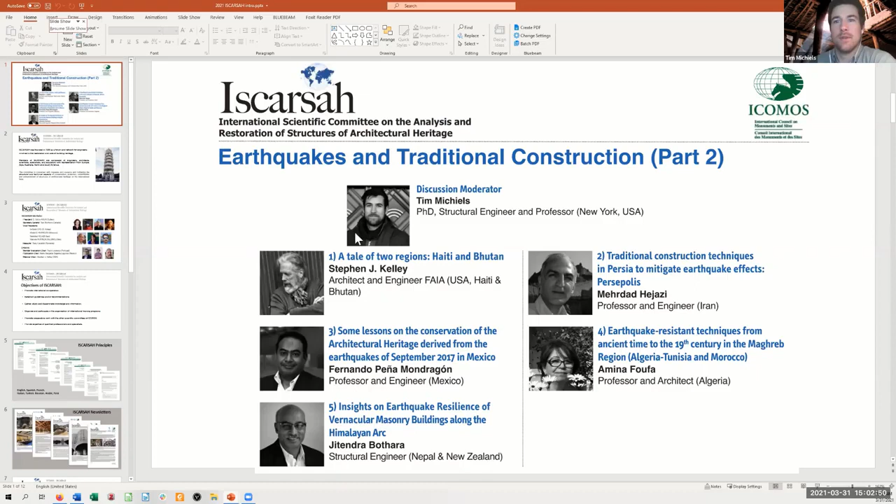by ISCARSAH, the International Scientific Committee on the Analysis and Restoration of Structures of Architectural Heritage. While more people join, I want to briefly introduce our scientific committee. We are an international group of engineers, scientists, and educators dedicated to the restoration and care of built heritage. We focus on the structural and technical aspects of conservation of architectural heritage.

We have an elected board. Our president is Gorun Arun, and our secretary general is Tom Morrison. He is leading the discussion in the chat today. The goals of ISCARSAH are, amongst others, to disseminate knowledge, promote international cooperation, and organize international training programs. Another goal is to collaborate with other scientific committees, and we are happy to welcome members from a wide variety of ICOMOS committees attending today.

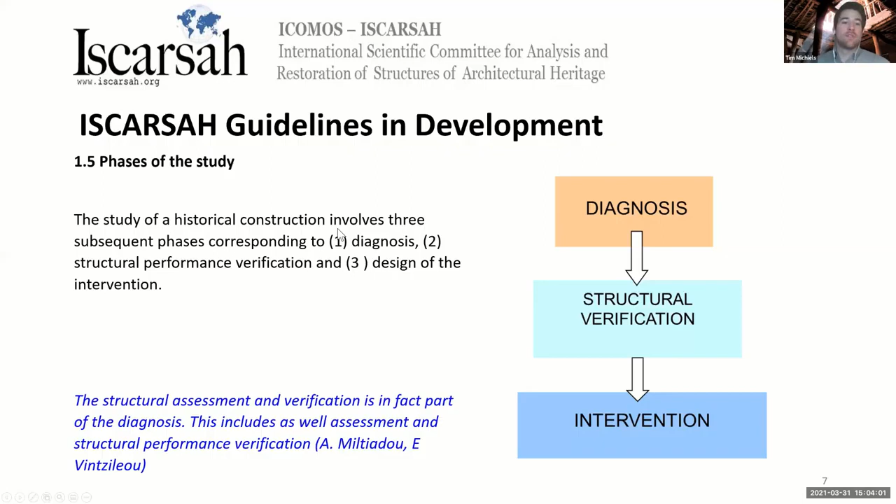In the past years, ISCARSAH has published Principles for the Analysis, Conservation and Structural Restoration of Architectural Heritage. We publish newsletters and currently are developing guidelines for the analysis and restoration of heritage structures. Pre-pandemic, we were organizing yearly workshops. The latest ones were in Korea, Turkey, and the very latest one in Iran.

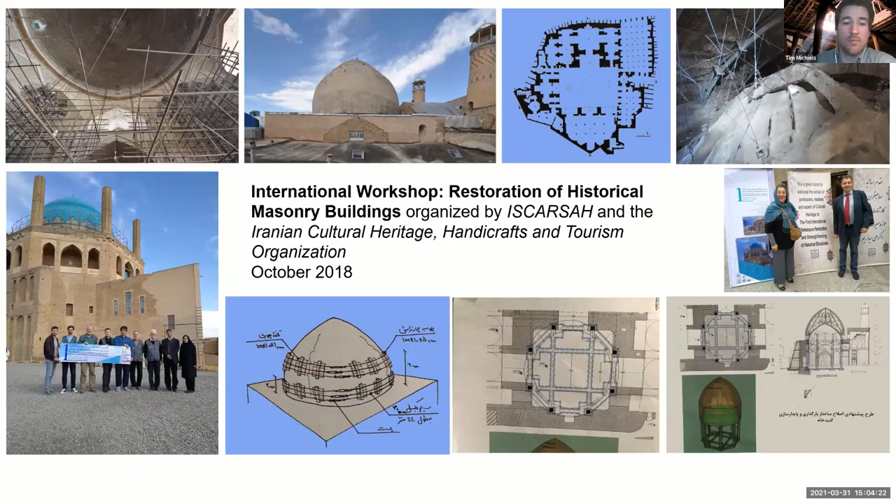Okay, that brings us to our webinar on traditional construction and earthquakes. In this webinar series, we are highlighting traditional structures because these buildings are often seen as the most vulnerable to earthquakes. Often, though, these buildings have seismic mitigation strategies built in as part of their original construction or past repair.

Unfortunately, the built-in knowledge has sometimes been lost or is misunderstood. And thus, as safekeepers of old buildings in earthquake areas, we all grapple with the same question: how do we ensure the life safety of the users of a building while also making sure that that building is preserved with all its valuable features for future generations?

Sometimes engineers take a conservative approach that tries to maximize structural strength, yet they go well beyond what is actually needed to ensure life safety. Often, this damages valuable elements of the building, and those well-meaning interventions might paradoxically in the end contribute to a building's destruction. Additionally, the regulatory framework provided by building codes to properly deal with traditional buildings is often lacking. Thus, we need to study, learn, and discuss traditional architecture, and that's why we are here today.

Building technology in seismic regions has evolved over centuries, leading to local seismic cultures. Today, we have another 5 distinguished speakers who will discuss the local seismic cultures they work on. We also hope to hear from you. We look forward to taking your questions after all the presentations.

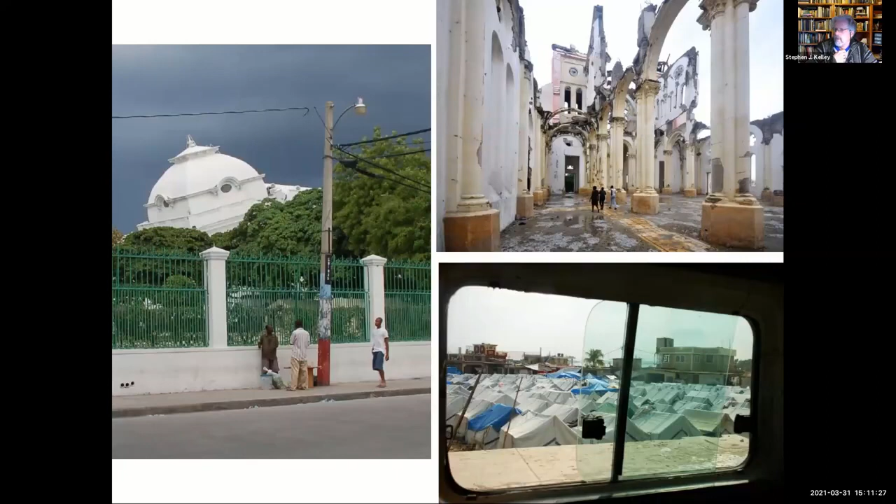So what I'm going to talk about is the gingerbread houses of Port-au-Prince. When we went in 2010, there were about 300 gingerbread houses, all built from the 1880s to the 1920s. We looked at about 200 of them, and there are about 150 remaining.

The construction types well known for Haitian gingerbread houses are: number one, timber frame, or pan de bois; wattle and daub, or colombage; and unreinforced masonry bearing walls. The mortar used is a mixture of clay and lime, and the wood was locally harvested.

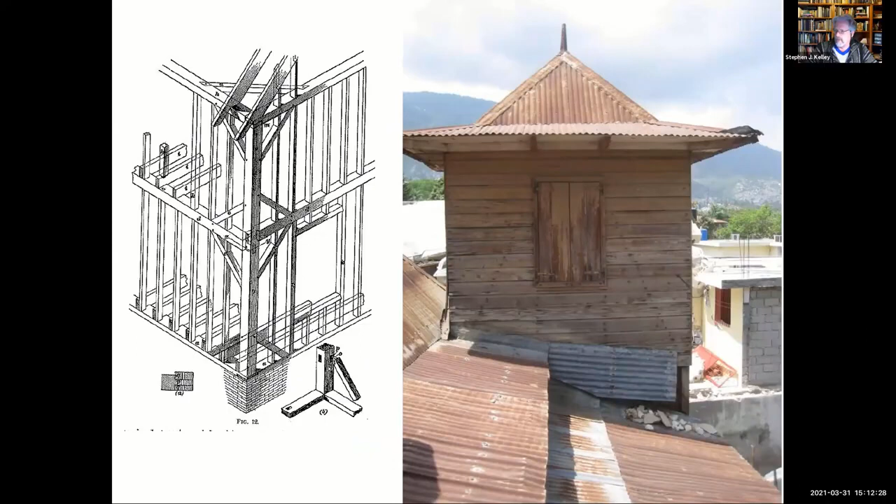The first part, the timber frame — I think many of you are familiar with this type of construction. This is a wood construction that has a brace frame in it. And there's an example of a gingerbread house made mostly from timber frame.

Then there's the colombage, or wattle and daub. This is a timber frame building where the infill is filled with either rubble, stone, or brick.

After 1925, when wood construction was banned in Port-au-Prince, a lot of concrete block or reinforced masonry structures were built next to, or as additions to, many of these buildings. These building forms did not work well together, which was something we saw during our first assessment — but that's a talk for another time.

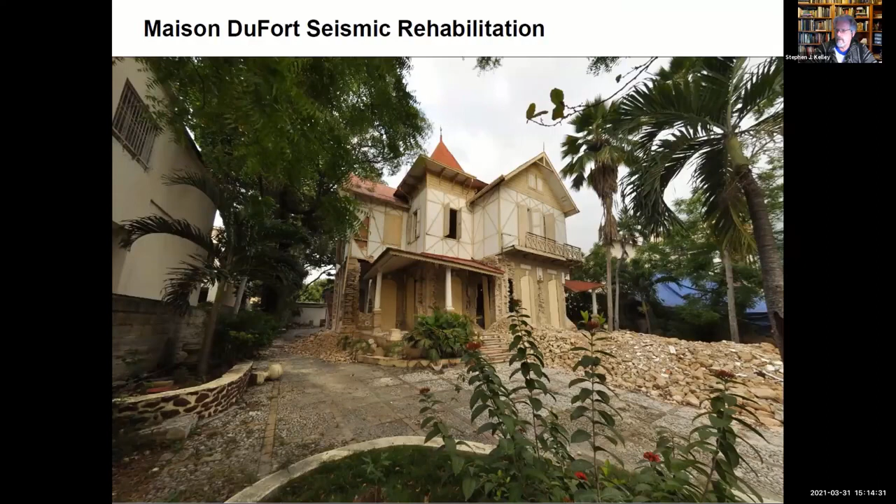The interesting thing we saw with this particular building is that the first floor, which was unreinforced masonry, was entirely destroyed — you can see the condition. We were able to go up those stairs very carefully, and found that the second floor was in fair condition.

I have to give a shout out to our colleague, Randolph Langenbach, who we were with. Randolph was the person who noted that we had these horizontal metal ties in just about all of these unreinforced masonry gingerbread houses that we saw.

They had these wonderful fleur-de-lis patterns where they came outside of the building. This here is from the Maison DuFort. This is one of the reasons why the Maison DuFort didn't entirely collapse, because these masonry ties were holding up these corner piers. If these corner piers had collapsed, the building would have just fallen onto the ground.

Randolph came up with this idea that since labor was fairly inexpensive in Haiti, what we should do is hold up the second floor with emergency shoring, and then reconstruct the first floor unreinforced masonry. We came up with this idea of putting in new horizontal ties.

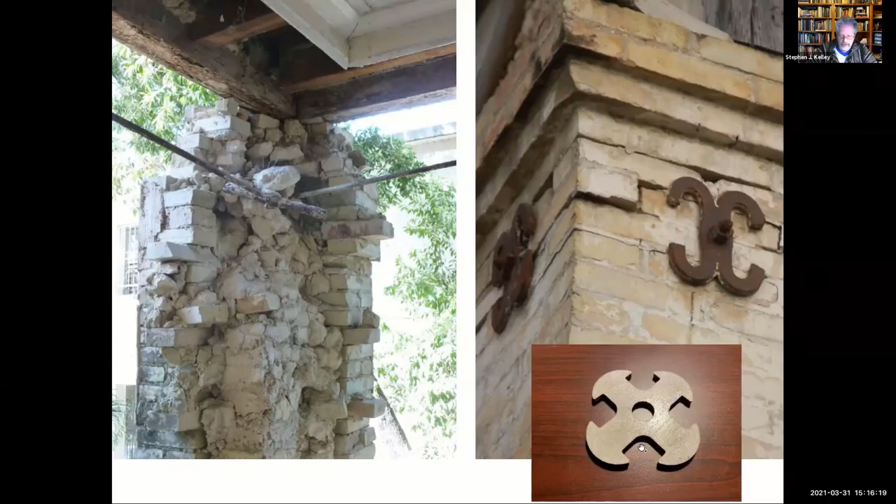Although we were going to put in many more horizontal ties, we made them out of stainless steel. Here is a stainless steel plate that we had fabricated in Miami. We cut it using lasers. You can see that this was about the same size as that. You'll be able to see some of those where we put them in.

So we came up with this scheme to hold the second floor in place. And we worked with our partners, the Institut du Patrimoine Wallon, which is out of Belgium, the southern part of Belgium. They were maçons and charpentiers, and they came in and they were working with the drawings that we were providing with our local architectural partner.

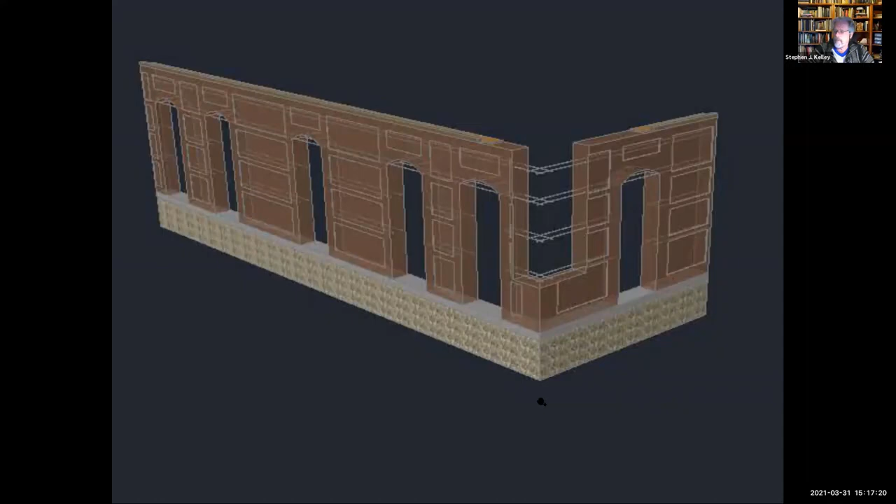Here is the building with the first floor removed and the second floor held in place. It was not moved, it was left in place. We had to do some work on the foundations, which I will show you. There was plenty of brick to be salvaged. You can see piles of it that our local counterpart was purchasing and having delivered onto the site.

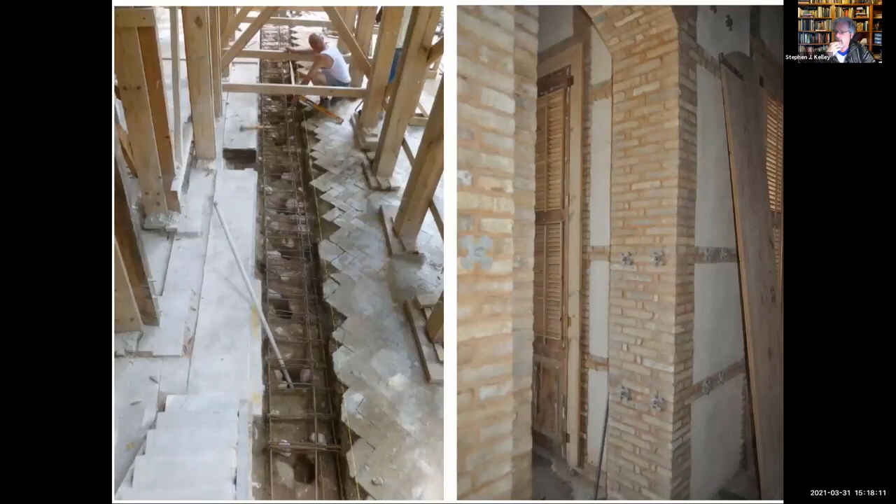Here is the foundation system. This is the only place where we introduced reinforced concrete into the project. The original foundations are rubble stone laid in clay, and we poured a grade beam on top of the foundation system, but below grade, and this is what we used as a basis to erect the new masonry walls.

This gentleman here is Patrick Lacroix from the Institut du Patrimoine Wallon. He was our mason, and he was actually doing a capacity building exercise, teaching local masons how to work with lime mortars. So we put the whole thing up with lime mortars.

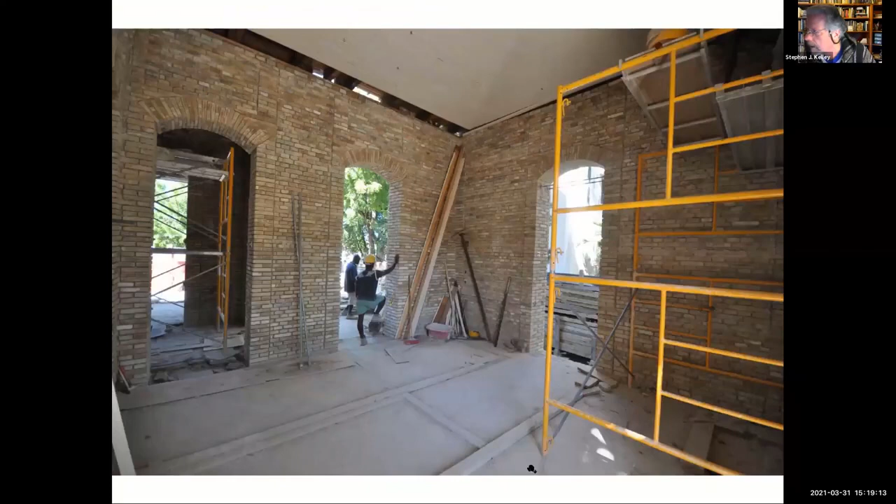Here you can see the walls almost being erected. And if you look here, you can see the fleur-de-lis pattern. And here are the walls ready to receive the second floor.

I wanted to run these horizontal stainless steel ties through all of these arch spring points, but Madame Pierre Louis would not have it. She agreed that I could do it in one area. I always like to show what the intervention is, and she allowed us to do it in this one particular area. So this is what the building looks like, fully restored.

This is during one of my visits on another project in 2017. This has become an art gallery and a venue for music and art performances. You can see that we were able to develop this very open atmosphere.

By the way, this building was built by Haitian architects who were trained in Paris. Because even though Haiti had its independence, people who were going to university, many of them went and studied in Paris. So this was designed by a Haitian architect. The forms are very French and European. However, the forms have been adapted for the Caribbean in that the entire first floor has no windows, there are doorways all around on the first floor.

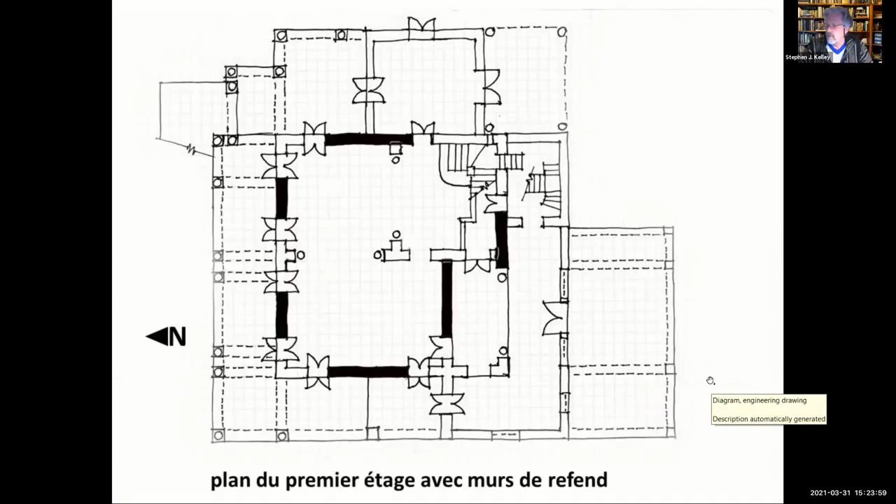And to give you an idea of what that type of thing looks like, these are the types of interventions that they were doing. My last visit there was almost a year ago. It was my last international visit before the pandemic came, and I was worried about being able to leave the country, and I've been able to follow what they're doing over social media.

Second area I want to talk about is Bhutan. Now, Bhutan is located between India and Tibet, which is now part of China. So it's in this arc of the Himalayas, on the southern slope of the Himalayas. My project was located in Paro, which is where their international airport is. And I'm also going to talk briefly about the Wangdu Phodrang Dzong, which is here. So I was working in these two areas.

By the way, for those of you who were able to join us during the first webinar, Professor Arun Menon talked about his work at the Wangdu Phodrang Dzong.

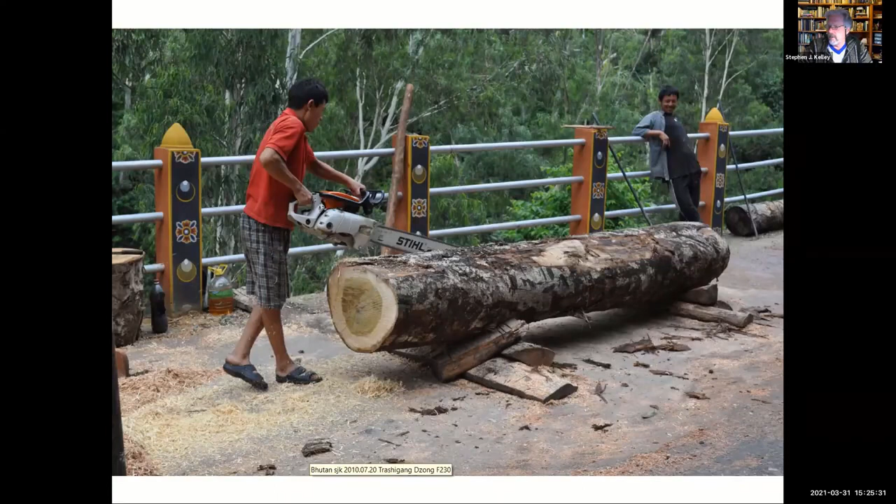Here they put up the formwork on either side. They normally lay a horizontal wood member within the rammed earth wall - that's something important to remember in this talk. And then the roof is actually separate from the rest of the building; you see the roof is sitting on the building. So during a seismic event, the roof is not going to be bringing a whole lot of mass to what's happening there, because it's going to be moving separately.

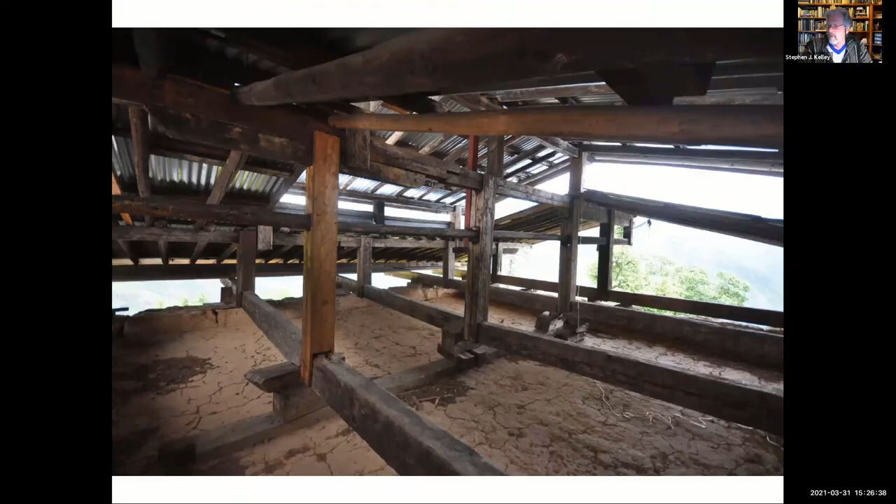So I'm going to talk about the Sito Gumpa. This is a monastery. Here is the temple itself and the monks' quarters on either side. Here you're looking at the temple straight on, and here is the other side. The temple has these beautiful paintings on the inside that are placed on paper.

So this is what the floor plan of the entire monastery was like, and here is the temple. The idea was to seismically rehabilitate the temple, and these areas here were rehabilitated. Actually, they were reconstructed - pulled down and rebuilt on site, because you can do that with rammed earth. One thing we did was add a separate kitchen and dining room to complete the courtyard, because the kitchen was on the second floor of this structure and we were worried they'd burn it down. They have problems with fires here, so this was the plan for the entire site.

These are some of my partners in crime, Chuning Dorji and Karma Wangchuk. Sonam Tashi is not in this photograph, although I hope he has called in this morning. He is - a shout out to Sonam, Chuning, and Karma.

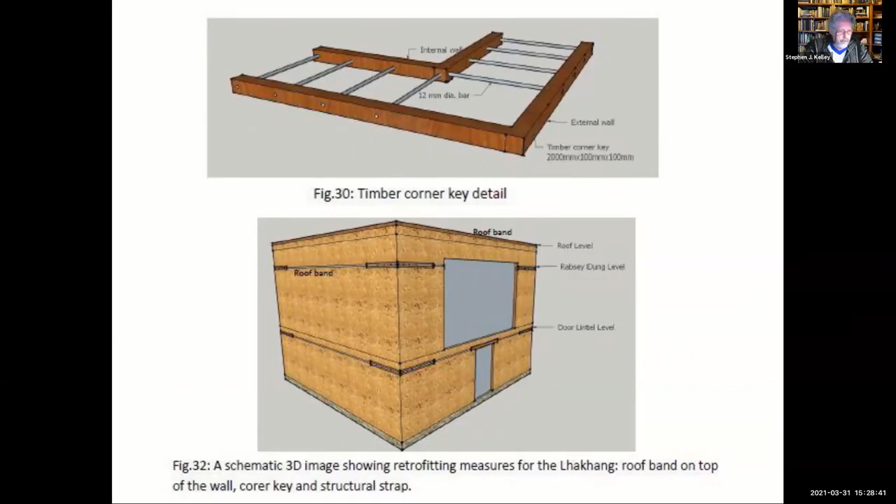At the beginning of the project we had a long four-hour ceremony that included ritual dancing and a feast where all the villagers came in. And then we went to work.

Here's the inside of the temple with all of the paintings removed. I believe those are some of the paintings there that are wrapped up in the paper.

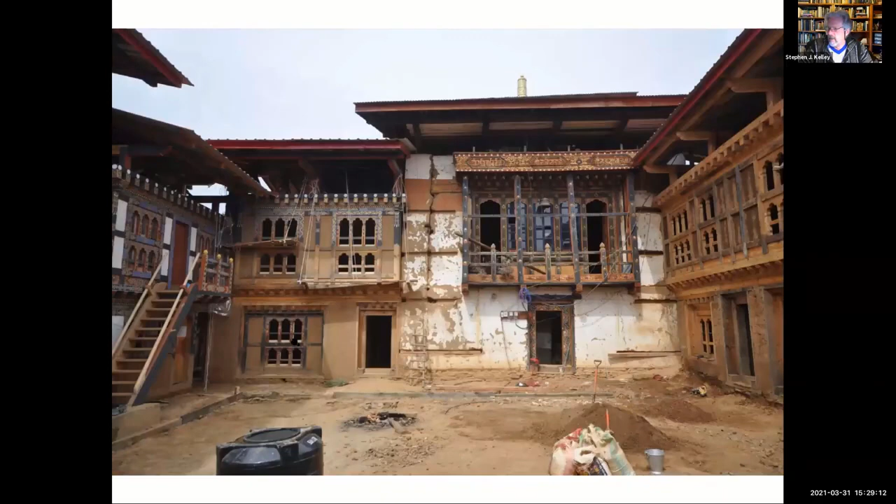You can see now that a lot of this area has been reconstructed, and here is the temple, and here is where we're cutting in and installing the wood. It's going in now, and here is the entire group of people that were working on the monument.

Here's Sonam, and here is my favorite plumber, and the entire group of villagers who were working on this. We had to wait until we were off season because all of the villagers are rice farmers.

And the exterior of the temple, you can see that. And here's the last part where we're actually wrapping it with a polyester strap - it's the same material that is used for seat belts in a car.

Then they were covered with a clay parging on the outside - everything is clay. You can see that we are actually leaving the strap exposed in these particular areas because we want people to be able to see what the actual intervention is.

And here we're finishing up this project. The paintings went back in place. We had a ritual to dedicate the new temple, and that's the completion of the Sito Gampa monastery.

In the last minute, I'm going to quickly show you the Wangduephodrang Dzong. This is an administrative center that has a series of courtyards, and the important aspect here is this building called the Utze - you can see the Utze here.

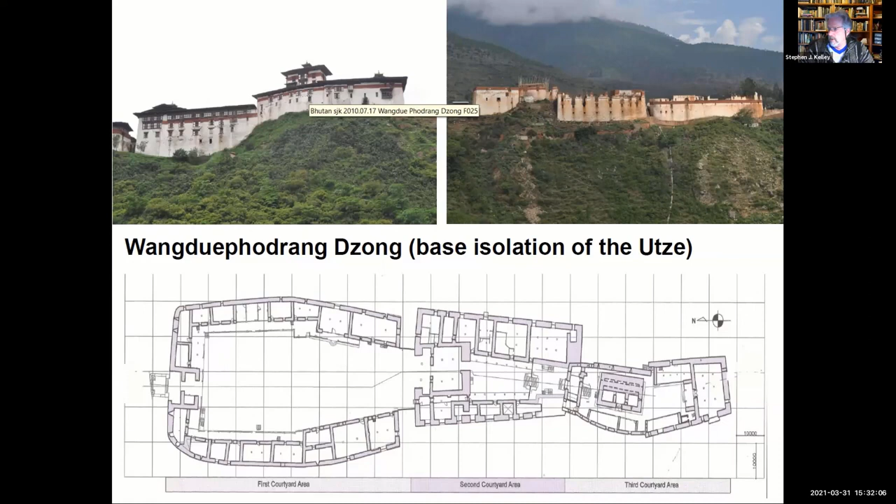And so with that, I'd like to say thank you, and open it up to questions or go to the next speaker. Thank you very much.

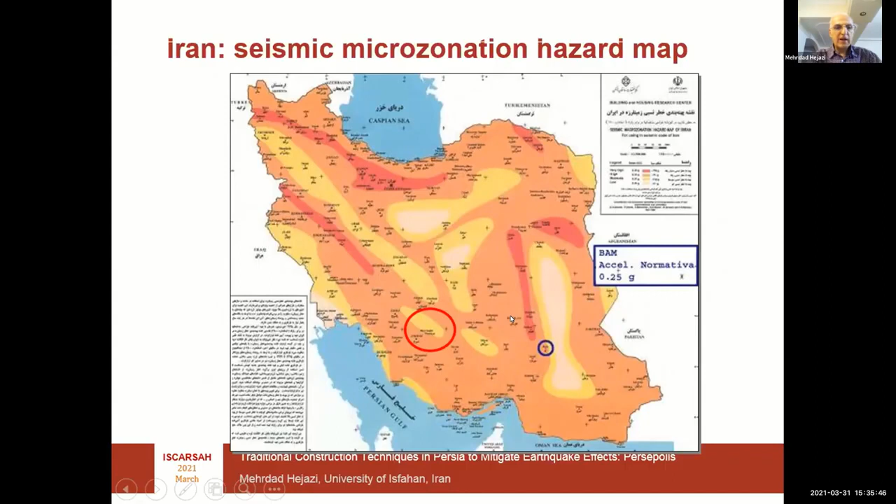First, let's have a look at Persepolis. It's quite a huge site, more than 120,000 square meters in area, and its construction took about 100 years. And this is what we see today.

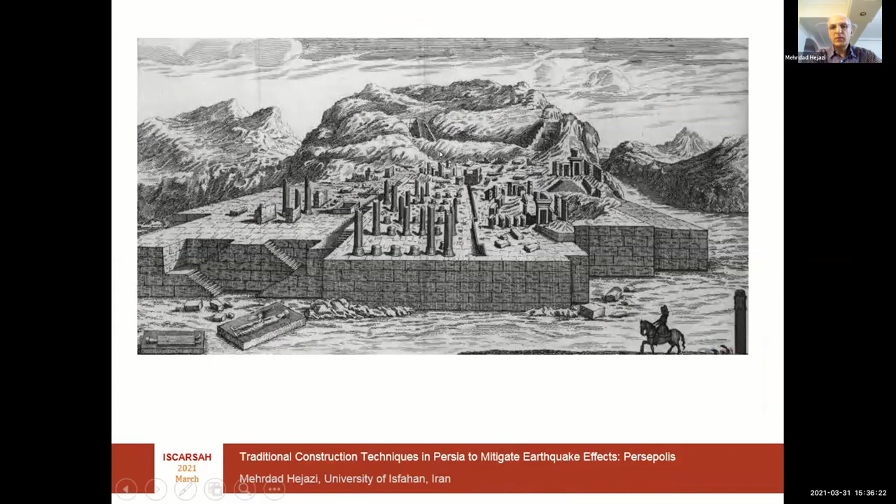As you can see, the site is constructed on a high platform, just adjacent to a mountain here. And if we go back a few centuries ago, say 25 or 23 centuries ago, this was the situation it had. And it is very important that this site was not a governmental site, but it was a ritual site for celebrating the New Year, which we call Nowruz in Iran, and it is on the 21st of March. Since then, still we have the same ceremony, and it's a very important ceremony for Iranians to celebrate that. Therefore, the Persepolis Palace was very important to Persians.

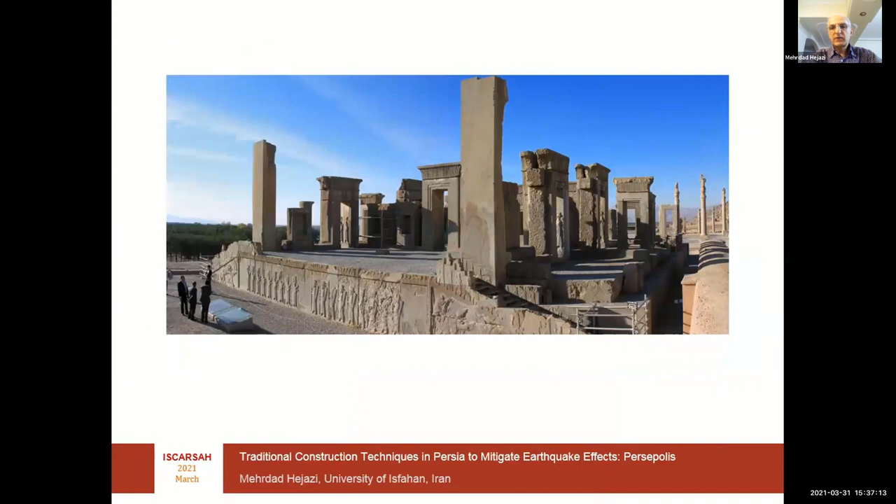It's the situation at the moment. These are the remains of the site. There is a World Heritage site, it is very well preserved. And even there have been some researches into the building, this site. For example, if you have a look at the plan, you can find the golden proportion there. It means that the design of the plan and other dimensions were based on some ratios, mostly on the golden ratio.

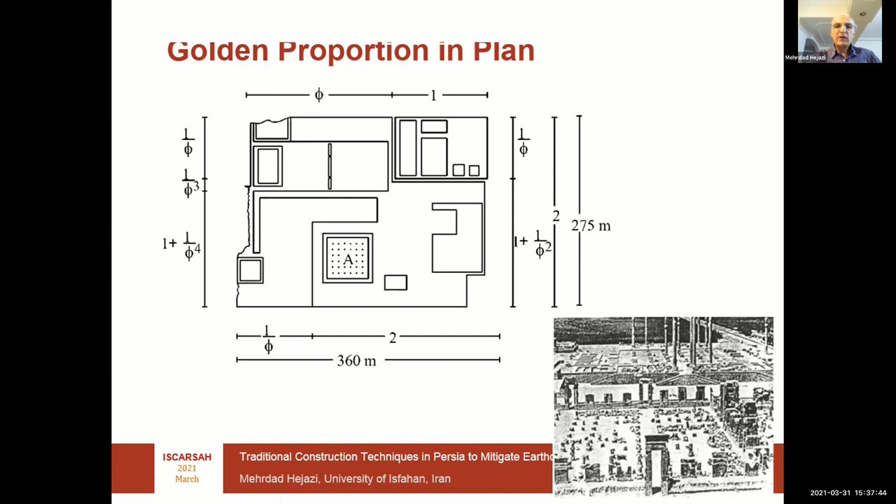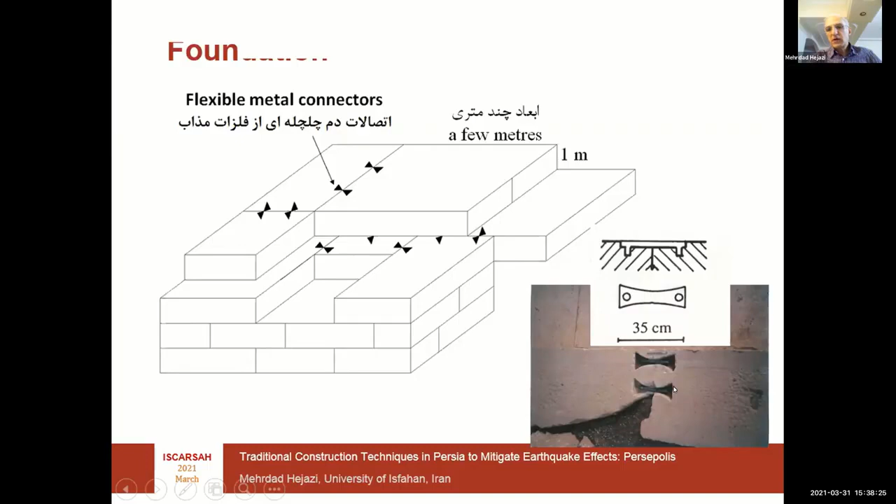Let's go to see how the foundation was built at that time. As you can see, the foundation was built in several layers of stone. And these stones were connected with flexible metal connectors. We see the same procedure, the same method, for other sites. Even at present, you can see the metal connectors which connect the stones together, and still it works.

This is the remains of Pasargadae Palace, and this is the tomb that most of you know. It's the tomb of Cyrus the Great. And if you go to Naqsh-e Rostam near Takht-e Jamshid, near Persepolis, you see some sort of stone tower which worked as a calendar for the new year and some sort of ceremonies.

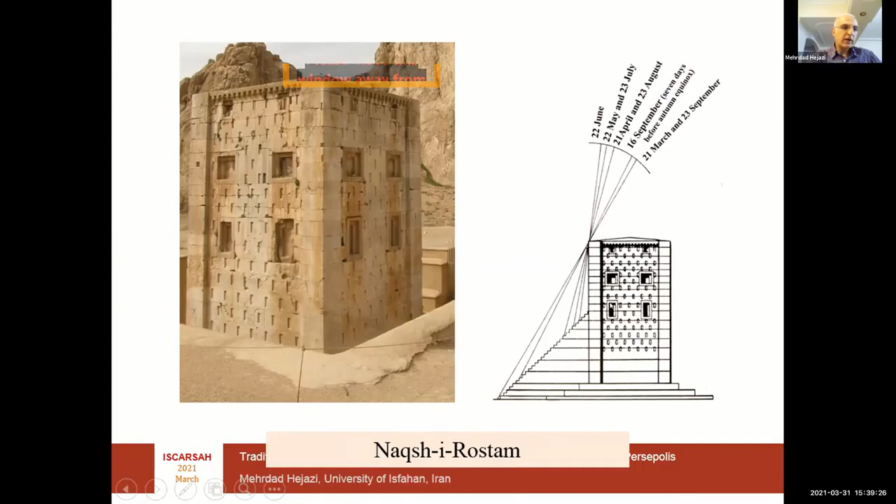Let's have a look at the foundation. We start with the foundation of the tomb of Cyrus. As you can see, they dug the ground, they went down 1 or 2 meters. Then they put the first layer of the foundation, which was stone, and then they put the second layer or the upper layer of stone. They were just put together with no connection. You see the same technique used in that tower here - the first layer and the upper layer on the ground level, and also on other buildings.

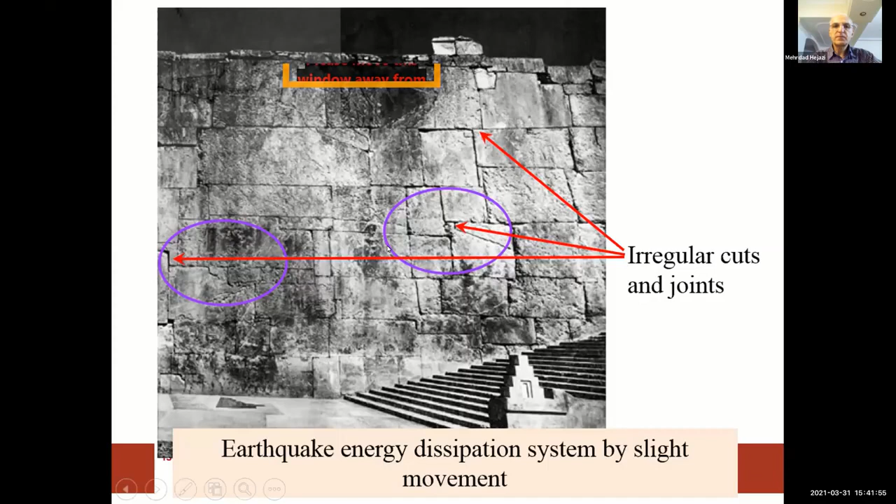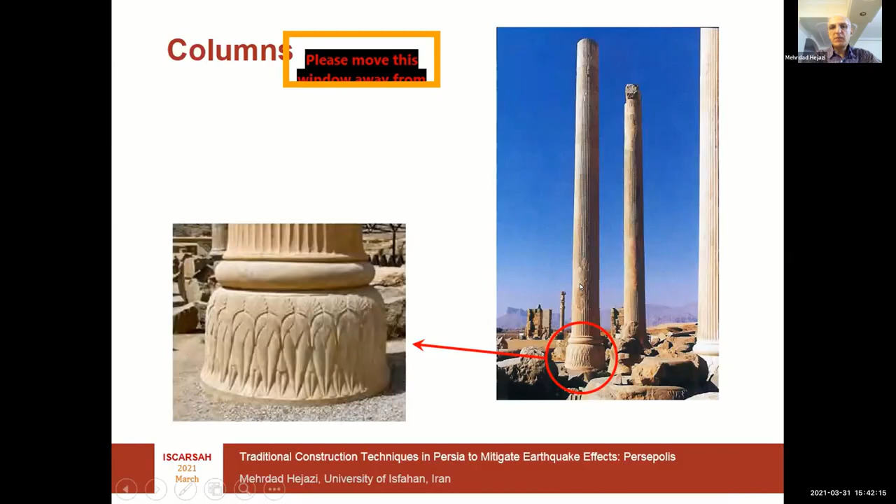Let's go to the columns. If you have a look here, there is a special connection between the main part of the column and the support part of the column - it's like this. There has been a connection between the two parts in order to make it possible to rotate somehow, because with this technique it is not a rigid connection anymore, but somehow semi-rigid. This means that if the top of the column would like to move, it is possible at the bottom that you have some sort of rotation, and it prevents cracking or breaking of the stone.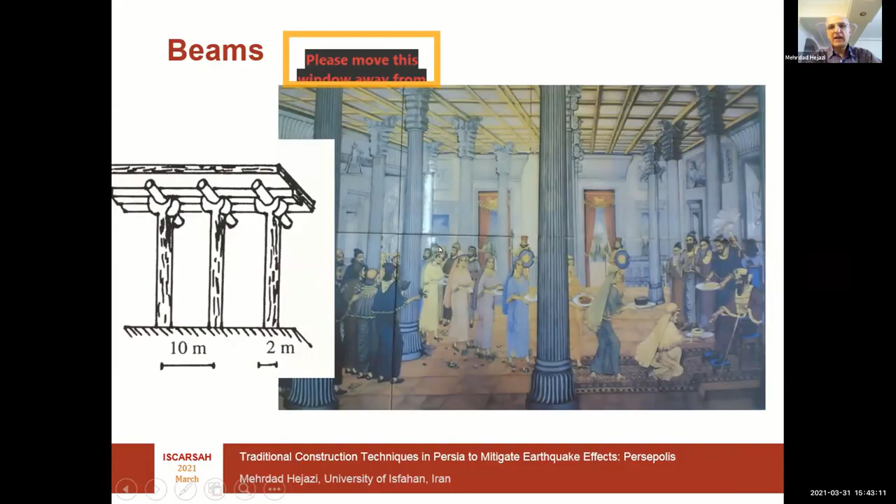And if we go for the beams here at the top, the beams were wood, and it's like this. Again, here you need some sort of freedom for both movement and rotation. Therefore, they didn't use a very rigid connection here, but some sort of semi-rigid connection, in order to allow the top beam to rotate and move in case of earthquake. This is how they were able to dissipate the energy of the earthquake.

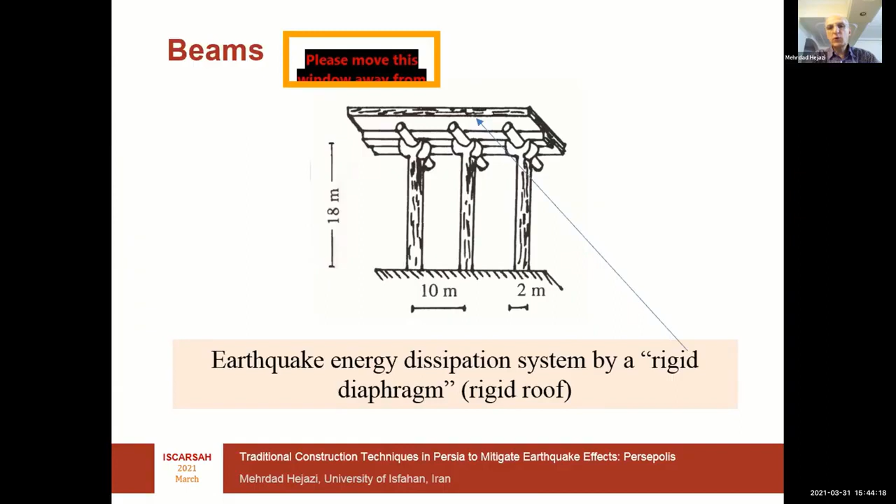More important is the rigidity of the whole roof. They used some sort of wooden roof in order to make a rigid diaphragm at the top, to make all the columns have similar and same movement at the top, moving in a similar way for all the columns. Having a rigid diaphragm or rigid roof is very important for those tall columns.

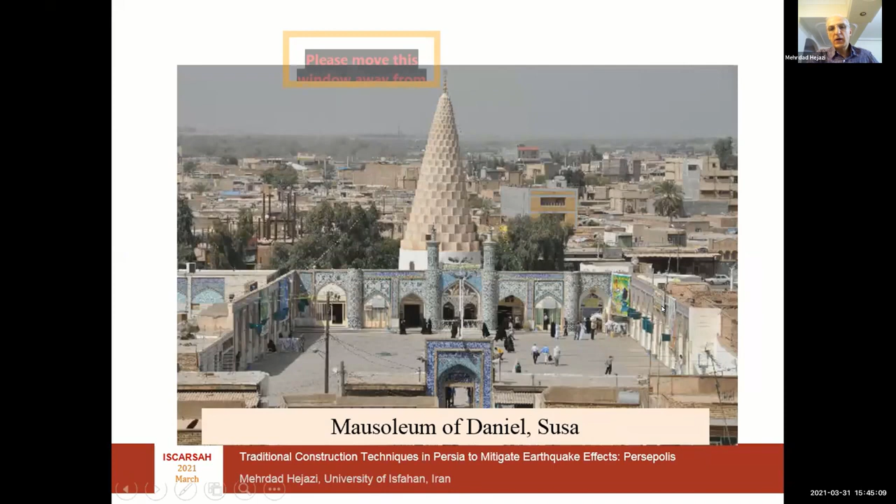This is the aerial photo. Here to the right is the Apadana palace of Susa, a very old one, the tomb of Daniel, and to the left is Shapur's palace, built about 200 BC. This is the situation - here you can see the Daniel mausoleum, here the Shapur palace, and at the bottom you can see the older part.

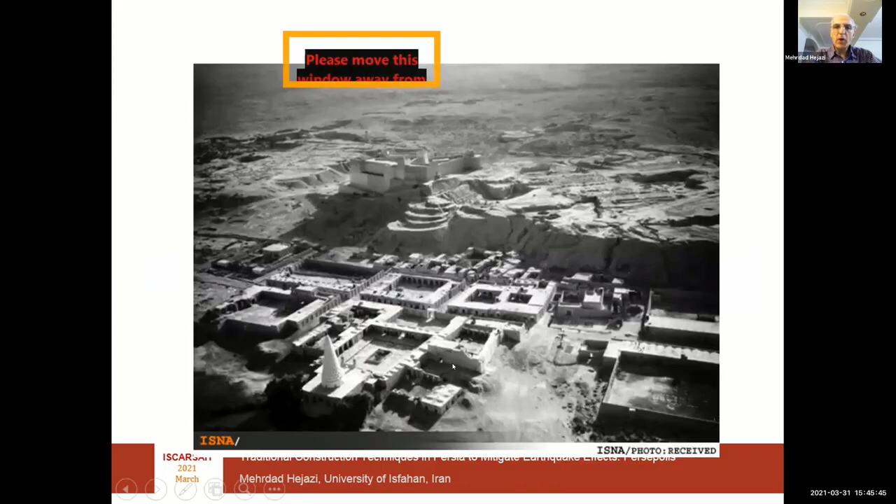If you have a look at the topography of the system here, to the right you see the old palace. It was very old - built 24 centuries ago. If you have a look here, the ground level was here, but they decided to bring the level about 4 meters up, and from here they started to construct the new palace like this.

At the very bottom, you have the remains of structures from the previous period. They added some sort of sand or gravel layer here, about 1 or 2 meters. From here, on top of the sand layer, they started constructing the palace with columns about 22 meters high.

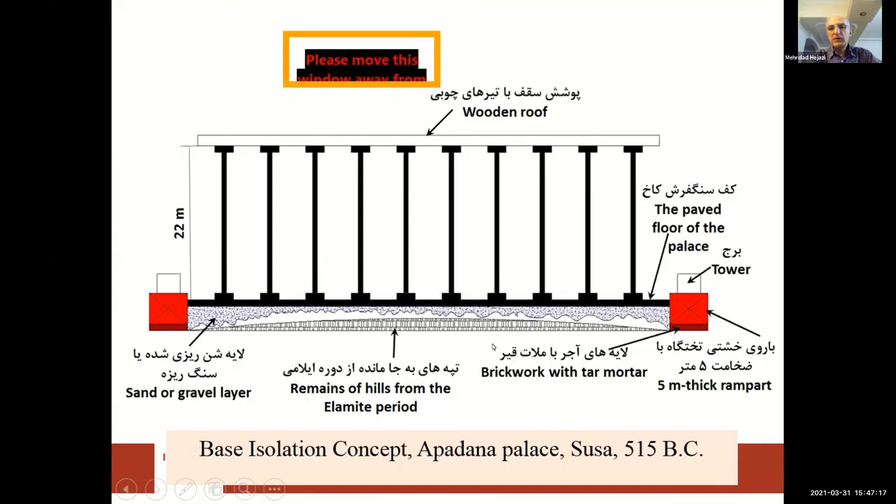When you have sand here, it's some sort of base isolation, in case you have some sort of acceleration or movement in the ground. These sand or gravel layers prevent the total energy from going up to the main building.

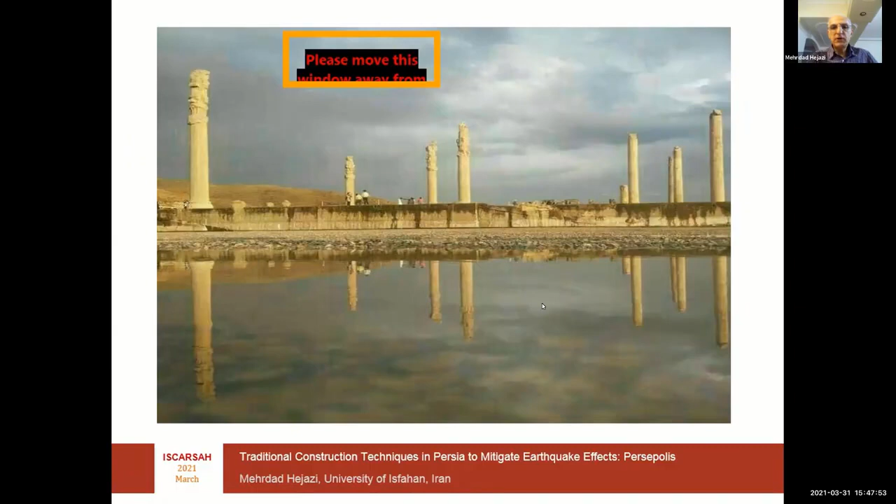Let's come back again to Persepolis. I'm going to talk about the sewage system, because I think it's somehow related to the foundation system of the site. If you have a look here, this is the site, and when you have heavy rain, it's like this. Therefore, for such a huge site, you need some sort of sewage system in order to drain and convey the rain and the sewage. This is what they found a few years ago.

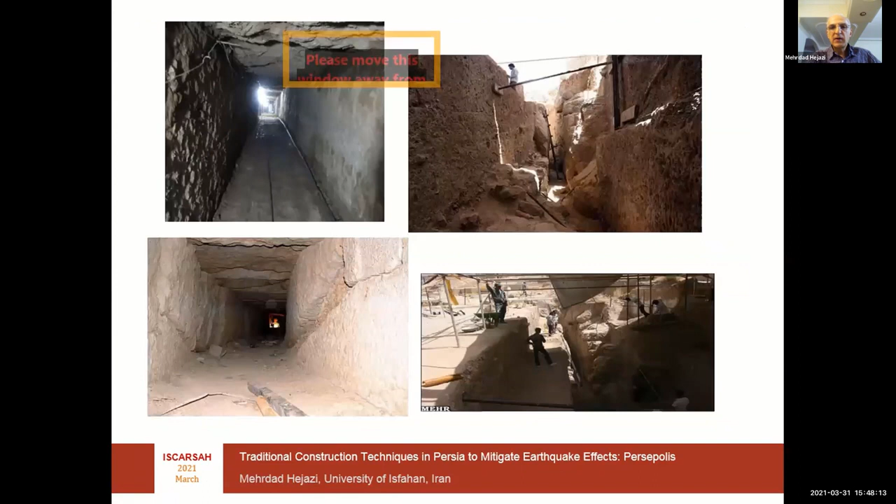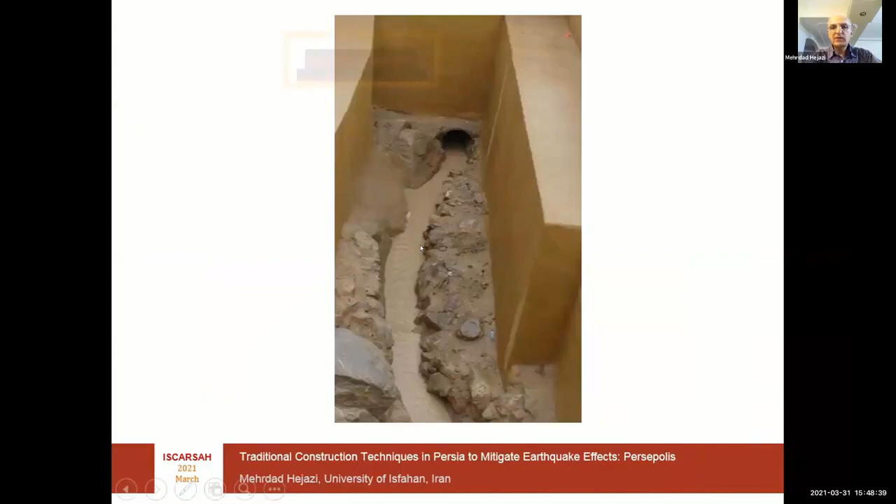As you can see, there is an underground sewage system, discovered a few years ago. Two years ago, we had a very heavy storm and rainfall there, and you can see it worked at that time. The city of Shiraz and nearby Marvdasht were both flooded, but interestingly, Persepolis was not flooded. Let me show you a movie which shows how the water is running inside the sewage system.

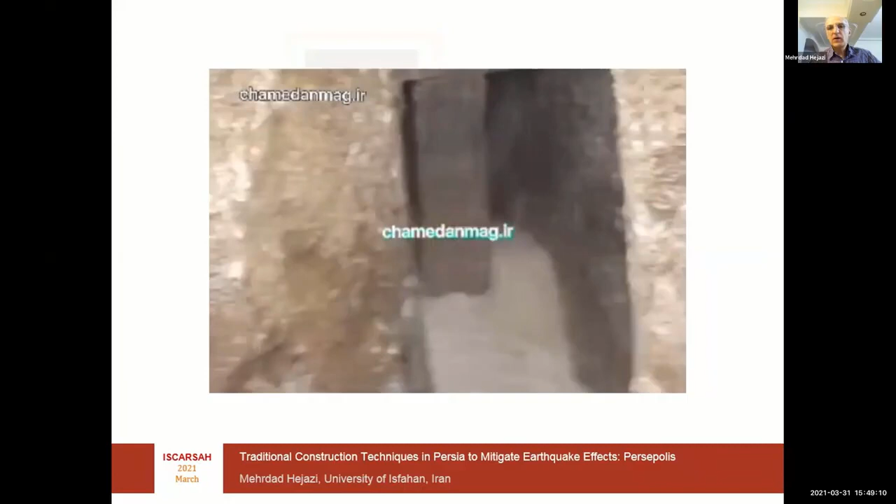This is at the same time that on the floor of the site there is no water, but 1 kilometer away, in a nearby city, there was flooding and many people had to leave their homes. It means that it is not just the foundation design for earthquakes, but also the design of foundations for floods or for the sewage system that is very important.

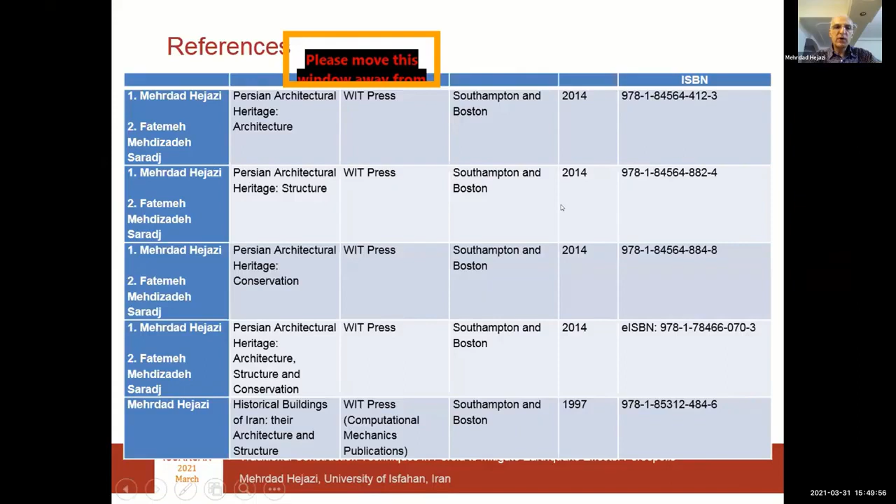Let me finish my talk with the memory of the ISCARSAH visit to Persepolis in 2018. I should give you some references here. There are 5 books that I, with my colleague, have written, and also some papers that you can find in the references. And also here is my email address in case anybody would like to contact me. It is possible to contact me. I thank you very much, and I hope you have enjoyed my presentation.

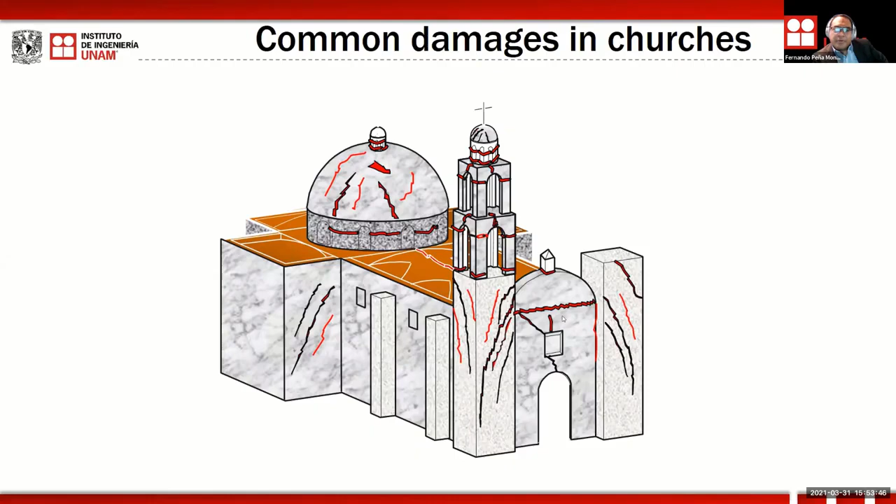After that, we made a survey trying to see and understand the different damage that occurred in these buildings. For example, this is the common damage in churches. There are many churches of this type, some small churches with one nave, in practically all the towns in Mexico, and we found this type of damage in general. In the facade, there is particularly only in-plane damage. Practically the out-of-plane damage is only seen in the frontispiece, due to the overturning of the frontispiece. And this is a really interesting picture.

This is a diagonal crack due to shear stresses in the tower. This is a front view, and this is the other part of the tower. It's as if the tower was cut by a knife. We don't understand why this part of the tower didn't collapse. Besides, there was a street nearby, and the street was closed because the vibration induced by cars and trucks passing could collapse the tower. So this is typical damage that we found in a lot of churches.

Another typical damage is in domes and drums—there was the typical cracking that we can see in the literature, with radial and meridional cracks. Some domes collapsed, or shear stress damaged the drum. Vaults also have the typical damages found in literature, with longitudinal cracks, especially because the walls that support the arches and the vaults open, which is the reason we find these longitudinal cracks.

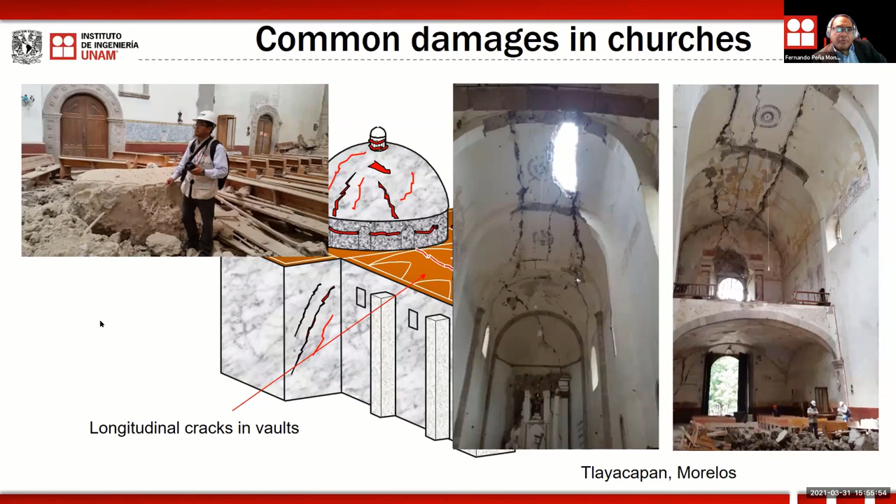In walls, we can see the typical diagonal cracks due to shear stresses. At the base of the walls, we can see horizontal cracks due to the flexural moment in the out-of-plane direction of the wall. We can also see vertical cracks due to shear stresses. These vertical cracks were found when the masonry was of very bad quality, especially when it was made with pebble stones and earth mortars, or very bad mortar.

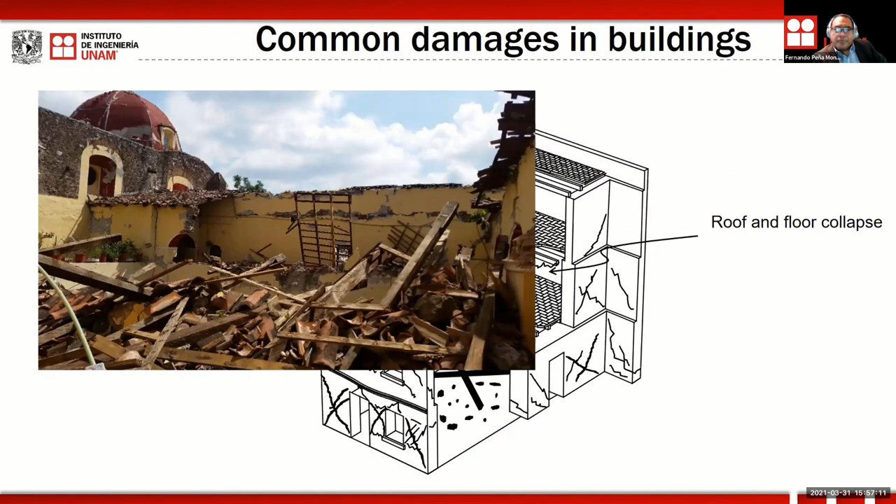Another damage we can find in some buildings, especially the monasteries that were attached to the churches we visit, is of course the collapse of the roof and the overturning of the center of the walls, like in this case. This particular case is very interesting because it was the cloister of an ancient monastery.

All the second floor collapsed. We can see here all the debris of the second floor, and this is how the material went down to the yard. In this case, the masonry was very poor, made by rounded stones, pebbles, and a very weak earth mortar, so from its origin the masonry was of very bad quality.

With very bad quality masonry, we can find a collapse mechanism where the structure disaggregates completely. When the second floor completely collapsed, the material behaved like a fluid, and all the material concentrated in this part.

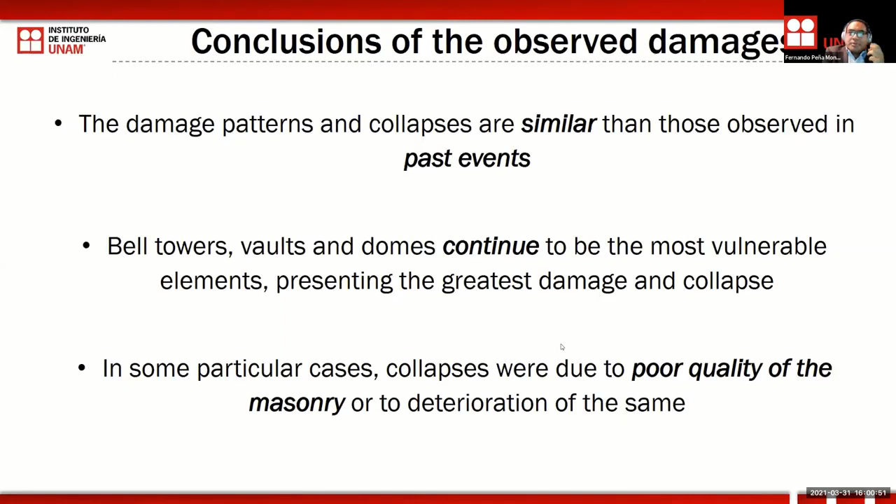In general, in Mexico, intervention projects are based on the ICOMOS and ISCARSAH recommendations. But authorities and practitioners take particular recommendations from the whole universe of ICOMOS and ISCARSAH principles. Especially, authorities recommend minimal interventions, non-invasive techniques, use of compatible materials and techniques, and of course traditional materials and techniques are preferred.

Unfortunately, these recommendations have become the idea that the best project is to return the structure to its original conditions. So in practically all intervention projects for these damaged structures, the aim is to return to the original condition of the structures before the earthquake. But what can we expect from an intervention whose objective is to return the structure to its original conditions?

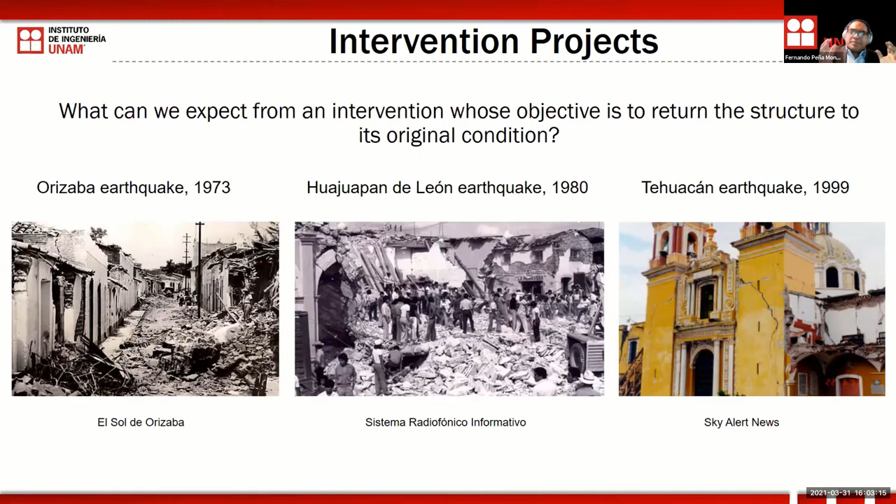Someone said insanity is doing the same thing over and over again and expecting different results. So if we try to restore the structure to its original conditions, we know what will happen with these structures in the next seismic event: we will have the same damages, the same weak elements, the same collapses.

So now we are trying to change this paradigm in Mexico. Actually, the paradigm is that the aim of the project is the conservation of the authenticity of the architectural heritage. We don't have time here to discuss what authenticity means, but this is the idea here in Mexico: the best project tries to conserve the authenticity of the architectural heritage.

However, we need to change this, because sometimes we forget the most important aim of engineered structures: the safeguard of human life.

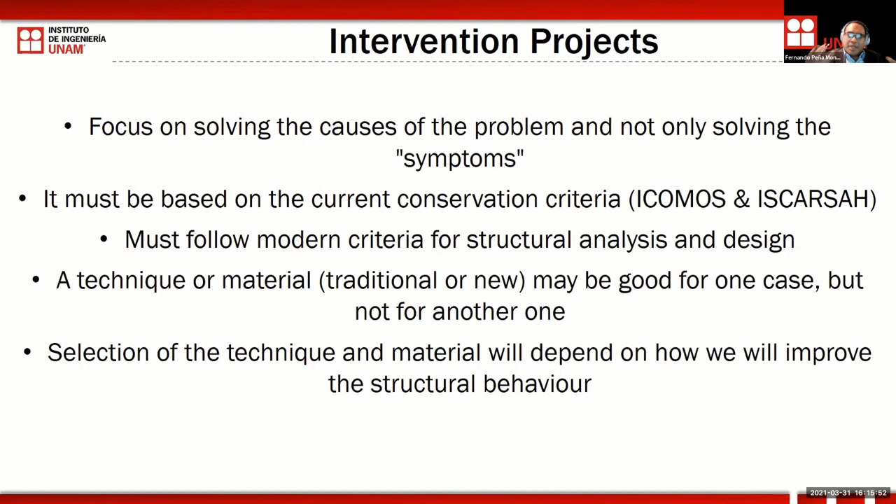So just as a summary of this idea that I want to share today with you, in Mexico at least, we need to change the paradigm. And don't forget that the most important aim is the safeguard of human life. After that is the conservation of all the values of the structures. So the structural intervention must improve its structural response. If we have collapse in the structure, it means the structure had a very bad seismic behavior. So we need to improve this, because if we do exactly the same, we will have exactly the same problem.

Due to the two earthquakes that hit Mexico in 2017, we have a lot of damaged buildings, and Mexico does not have the resources to conserve, intervene, or restore all those buildings. After three years since the events, we still have almost one-third of the structures that have not been intervened today. So this is a huge problem.

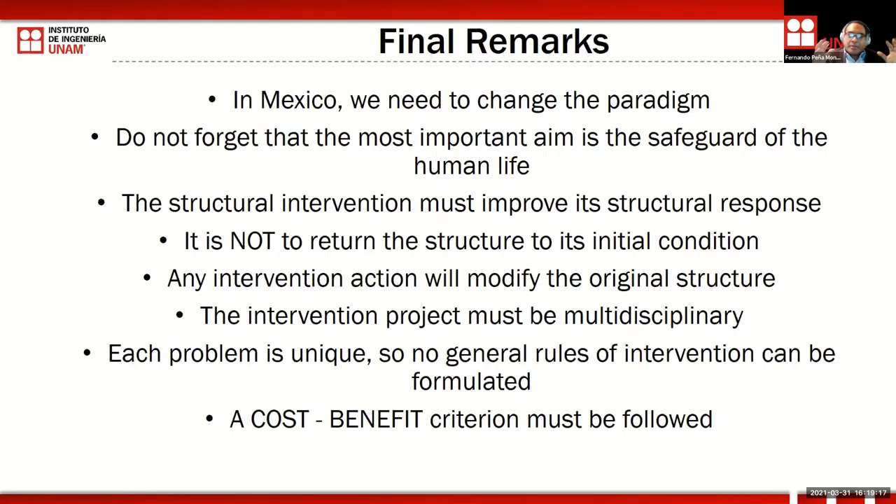So the intervention project must be multidisciplinary, trying to safeguard not only human life but also the value of the buildings. And each problem is unique, so we cannot make general rules - this is another problem, practitioners want a general rule to solve their problem. We propose that a cost-benefit criteria must be followed.

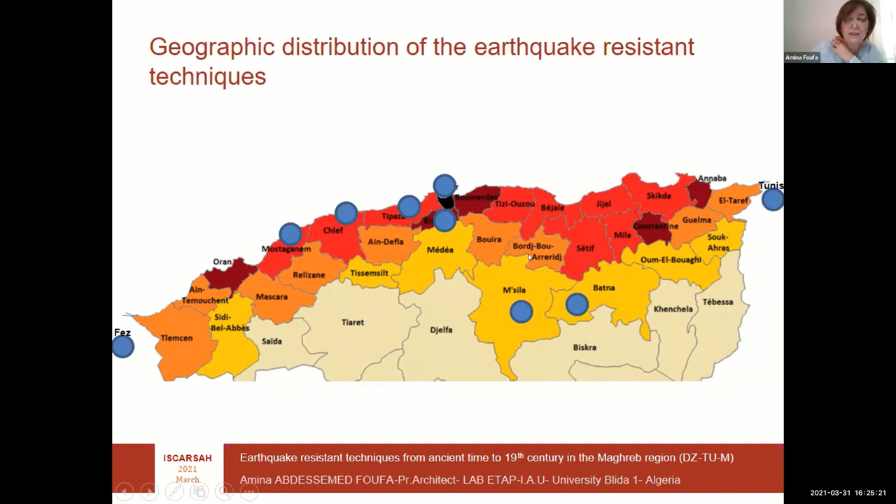The techniques developed are of two scales. The first are architectural and urban concepts, and the second are constructive. So we have architectural design and urban design, such as the sabbat, discharging arches, vaulted basements linked by arches, and from the details we have reinforced masonry with wooden logs, reinforced masonry by layers of bricks, and reinforced rammed earth.

During the Ottoman period and the Idrisid period, the three big cities, Algiers, Tunis, and Fez, showed typical characteristics of medieval Muslim cities, where building blocks are of various sizes. The plots are fully built, and the houses are leaning against each other, constituting a compact unit, forming narrow streets which are covered by galleries.

Sometimes these passageways are vaulted, or they are built with a roof. This passageway is called a sabbat. Beside this, we have blocks linked by arches, and these different characteristics of urban design constitute a structural continuum.

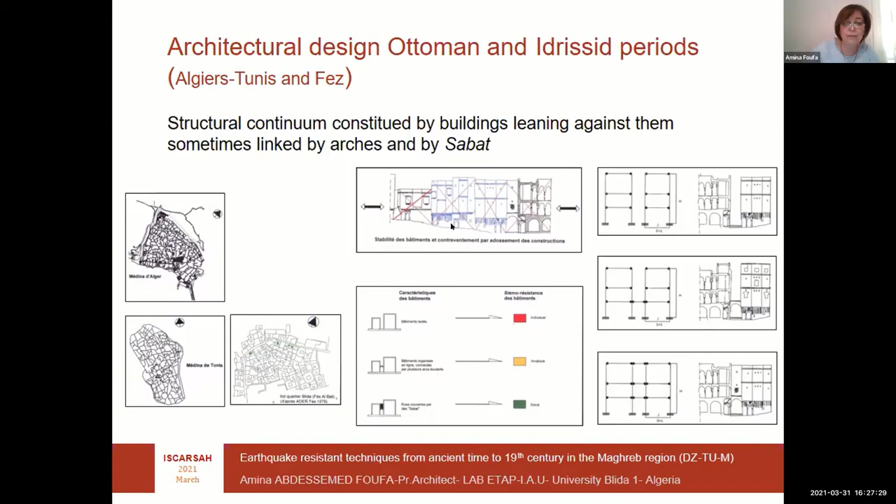When the passageways are vaulted and connect between the houses, this creates a passage connected to both sides of the houses. We have here in this slide different cases of the connection between the passageway and the houses, forming a structural continuum which dissipates the seismic load. We have different cases, some with just a basement and in the higher part of the building, we have vaults.

Between the two parts of the buildings, there are two series of cross vaults, inside and outside the houses, which connect between the two blocks.

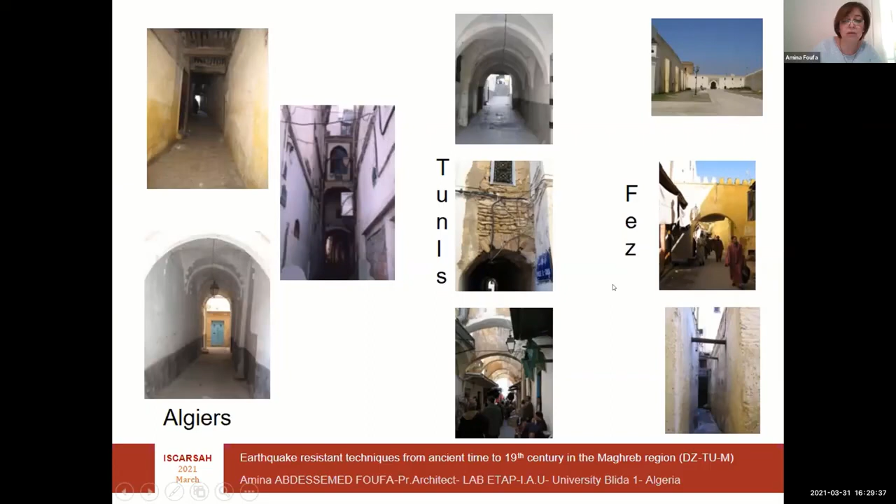During the 19th century and the French colonization, the recommendation of 1844 by the military engineers for the construction of Algiers prescribed, for both private and public construction, low buildings because of the seismic risk, and to vault the basement and join the buildings together by arcades.

I'm sorry I can't present photos here—I lost them recently, and unfortunately did not have time to go to the site to take new pictures. But it is written in the military engineers' report that Algiers was built taking this disposition into account.

From the part of the constructive detail, some techniques were discovered or highlighted during the in situ investigation in the Algerian and Maghrebian territory. Here we have an ancient time site of Caesarea, located in Algeria, and these techniques show a superposition of two layers of stone and flat brick. It's not a brick, but a plate made of brick, which is located or disposed on all the depth of the wall, and it is put in regular disposition.

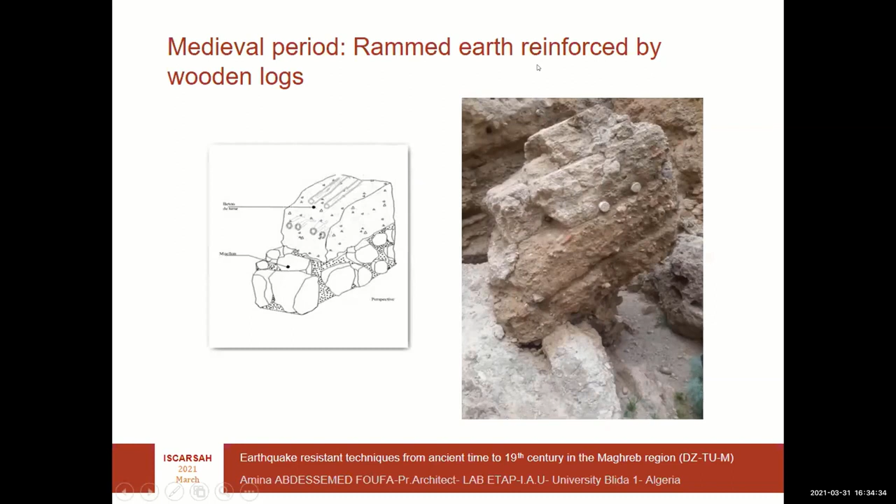During the Ottoman period, we found techniques of construction of the foundation of the column. We have superposition of two perpendicular layers of thuya, which is a cypress wood, and these logs of wood have the role of shock absorber, and it minimizes the amplification of ground acceleration. This is one of the techniques of energy dissipation in the foundation.

For the vertical structures, such as walls, we found that the wooden logs are inserted in all the depths of the walls, which are made of masonry, and we can show that in the walls here in Algiers, and this is in the site of Tunis, and these are in the site of Fez.

We have also this kind of technique reported in the pillars in Algiers and Tunis, and we have also the chaining at the angle, also in different cities. So here we have the chaining of the wall. These logs are put in this manner, where the greater fragility of the walls is due to the combination between bending effect, shear and torsion. So this technique diminishes the effect of torsion, and the angle did not collapse.

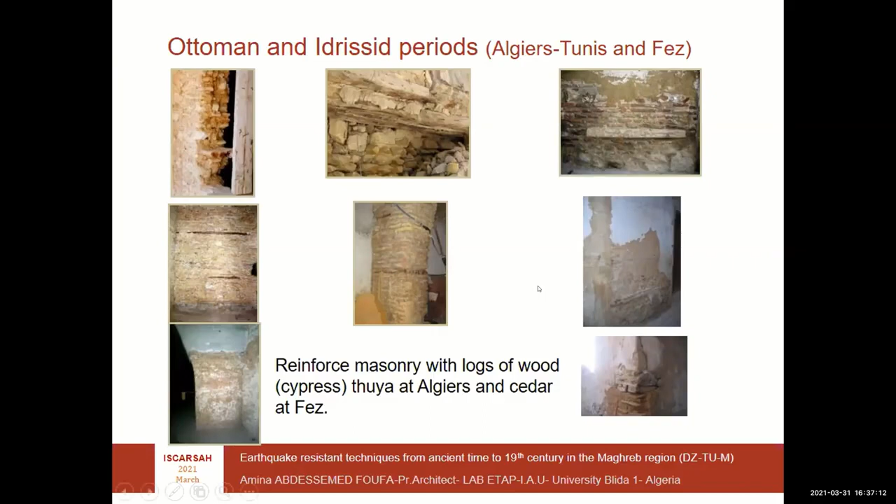In Algiers, there is a particular technique in arches. They are reinforced by logs of thuya, and we can find sometimes one layer when we have only the arches, but we can find also two layers of logs of thuya when the columns are supported... masonry vault. This superposition of two materials, one rigid and the other flexible, guarantees, due to the slip movement or rolling, a good resistance to shear during earthquake. And thus the system of arcade contributes to the resistance of earthquake loads. This is particular to Algiers.

Haven't found it in another site. This is the galleries of houses in Algiers. The other is in Fez, and the other one is the site of Tunis.

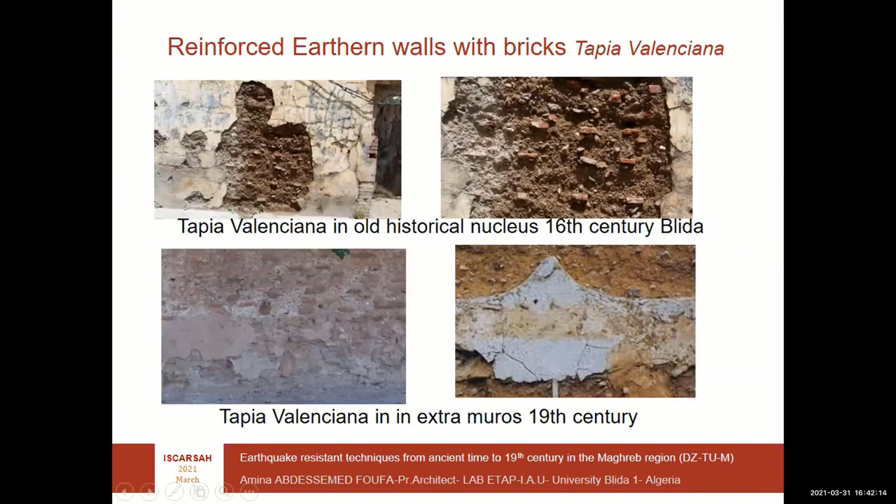And when the French were in Algeria, they used this technique because they knew during this time that the city is a seismic area.

In other regions, in the highlands of the West Highland, we discovered a system we called the traditional warning system. This system is made with beams and logs of trees, and a hooking system of wood elements. They detach when soil movement happens, and this happens not only during an earthquake but also during a landslide, because the constructions are on sloping soil.

So these techniques were used in the historical mosque during the 17th century, and the seismic activity in this region was known - the first known earthquake was the earthquake of 1858.

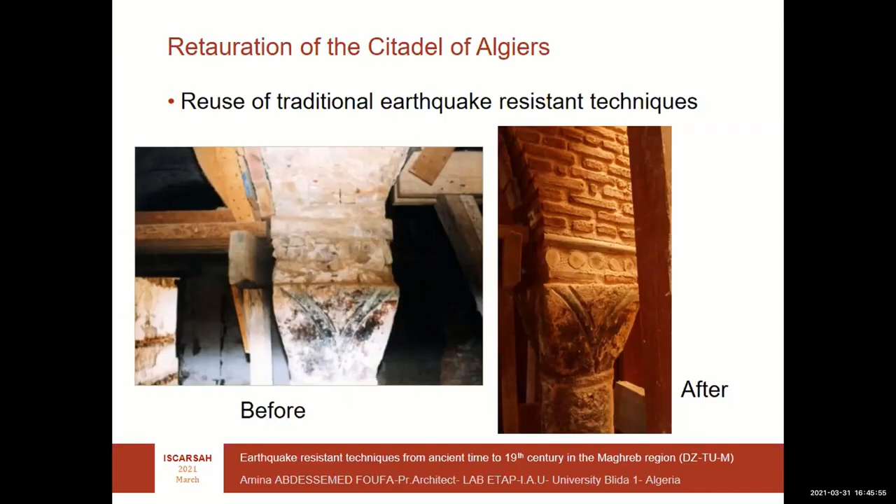Yes, it collapsed because the prototype was isolated. It was not connected with the other parts of the building or the other parts of the construction, but we simulated just a part of the vault of the mosque.

In conclusion, it is known that mankind has always known how to adapt to different natural risks, particularly earthquakes. In the North African region, and in particular the Maghreb, earthquake-resistant techniques have been developed despite moderate seismicity. Before regulation existed, from antiquity to the colonial period, earthquake-resistant techniques differed from one region to another. They constitute today the transferable indigenous knowledge of the Mediterranean basin. Thank you very much for your attention.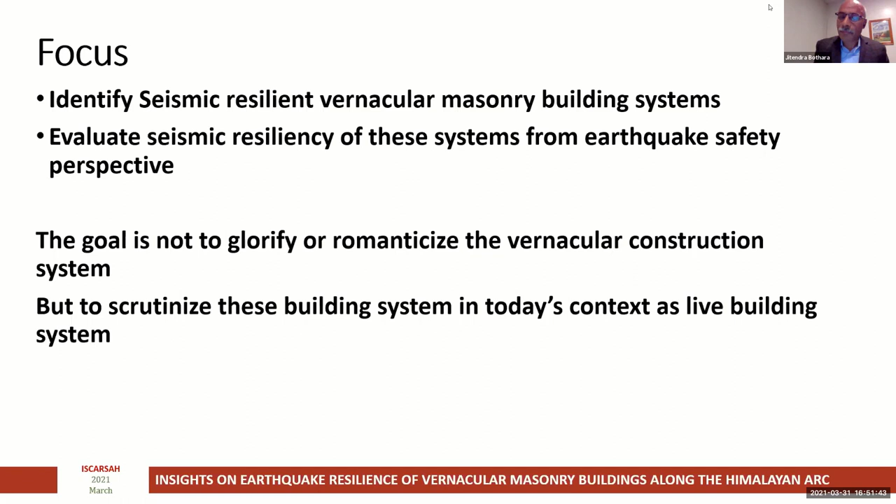But the fundamental question is, why should we study this vernacular earthquake resilient construction at all? Because earthquake after earthquake, it has been proved these are very weak, highly vulnerable construction, either you go to the Himalayas or anywhere in the world. So why should we study them rather than discarding them and bringing something more modern, which can provide us better seismic safety?

But in my opinion, and my observations working in many countries, I believe this vernacular construction can provide disaster risk reduction in a sustainable way. When I say disaster risk reduction, I'm not talking about only natural disasters, I'm talking about cultural disaster, and I'm also talking about socio-economic disaster. So they are sustainable systems because they developed over time from the experience of the people.

A large part of the Himalayas is still very inaccessible. If we are talking about this vernacular construction, the knowledge base is with the community. We don't need to bring technical engineering knowledge from outside. The construction materials are there, so people have no dependency on importation of material. They are socio-economically more amenable. They conserve culture, and environmentally, they are sustainable because they require minimal energy over their life cycle.

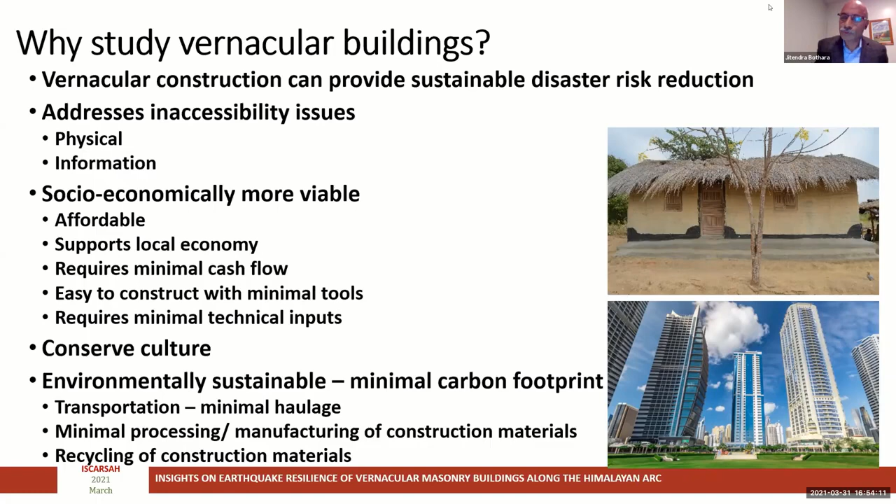So let's look at the Himalayas. From east to west, it is something like 2,400 kilometers long. And we all know Himalayas are the seat of mega earthquakes, many magnitude 8+ earthquakes. But let's look at the building types.

If you look from east to west, from Bhutan to almost close to Pamir in western Pakistan, you see a lot of building types which have survived earthquakes after earthquakes. Maybe some buildings are weak, some are stronger, but the most important thing is how intuitively, how intelligently people have used whatever resources they have to make these buildings earthquake resilient. So it is not a matter of weak or strong, it's a matter of how intelligently the system has evolved or developed.

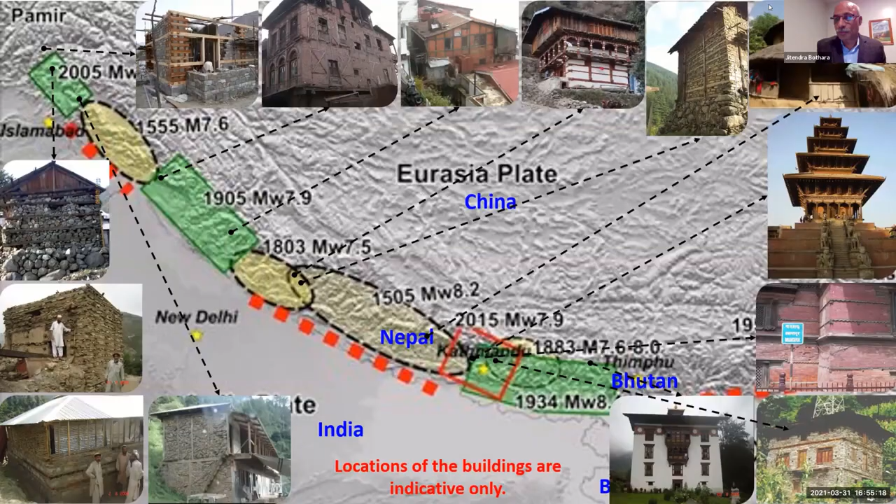If you look at these building types, we can broadly classify them into two groups. One is timber-laced masonry buildings, where timber runners or bamboo runners are laid along the length of the building, and they are tied together by cross members. These timber members, these runners, tie the whole building together as a box and provide box action. These timber members subdivide masonry into small parts, thereby preventing widening of cracks dangerously. And then masonry and timber work together as a composite system to survive earthquake shaking.

The other system is basically timber-framed masonry buildings. The good thing with this system is their walls are very thin, something like 4.5 inch to 8 inch, depending on brick or stone. They have timber frames with bracings, but the bracing doesn't need to be X-shape, it could be any configuration, as you can see in the left photograph. Masonry is confined in small compartments, and masonry is held by timber, and masonry and timber work together to develop a composite system.

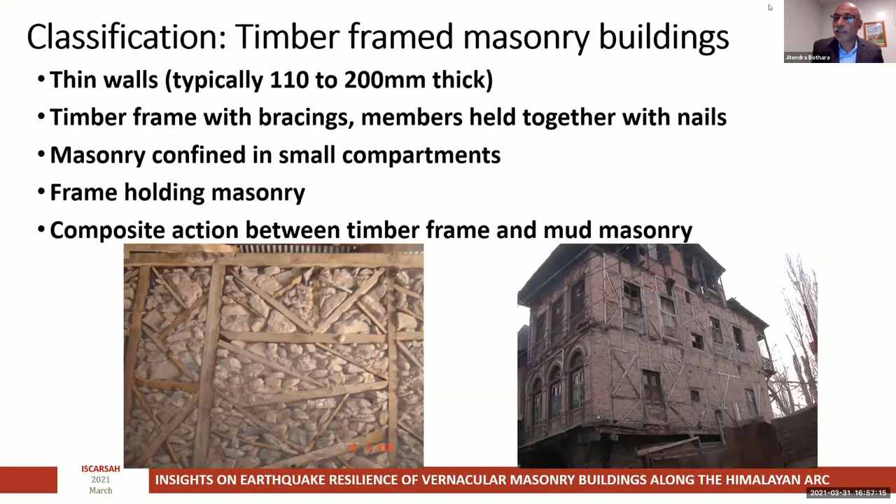If you look at earthquake engineering or building safety, there are two ways for a building to be earthquake resilient. Either the building has to be very strong, or it must have deformation capacity. We all know these vernacular masonry buildings are very weak, because the masonry is very weak due to mud mortar, or many times there is no mortar. We can't make it strong because there is no alternative in many areas, or most of the areas, I would say. Connections in these buildings cannot be made rigid, they are semi-rigid. We can't make them rigid like a welded or bolted connection. So they are relatively weaker than industrialized modern materials.

But the beautiful thing is, the people have turned this weakness into strength, so the building can survive earthquake shaking. Basically, people have adopted the deformation route, providing more and more deformation capacity to the system, so they can survive an earthquake. It is something like saying, if I am flexible enough, if you push me, I'll just deflect. You can't push me any further, because I am deflecting. And that's how these buildings work.

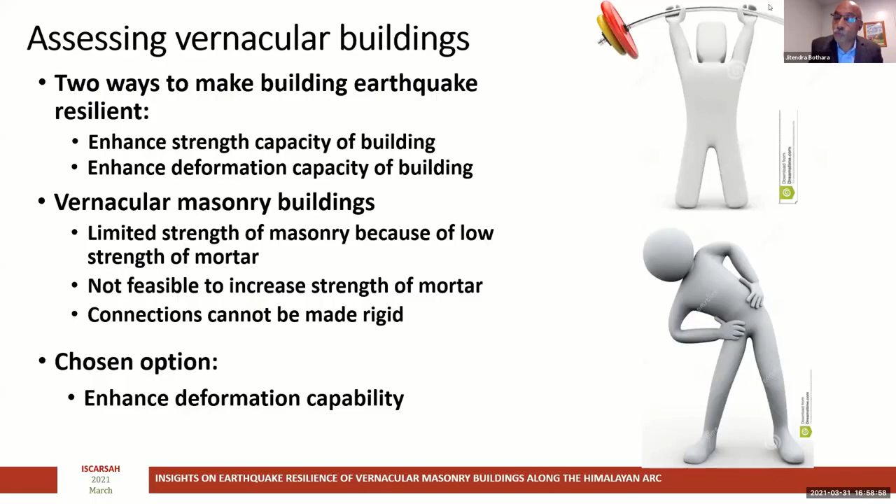But the important thing is, we lack understanding of these building systems. These vernacular building systems, the earthquake resilient building systems, work differently than the industrialized modern materials, buildings constructed of cement, steel, or rebars. And our building codes are written for these industrialized modern materials, which are mostly monolithic.

So we can't apply these building codes to this vernacular construction, and every time if you apply, what we find is these buildings are unsafe or vulnerable, whereas these buildings have survived earthquake after earthquake. So we need to rethink our strategy or our approach to these buildings.

Let's take one example. On the right, there is a building system, a base isolated building system. And what happens in a base isolated building system, the whole building remains as a rigid body, works as a rigid body without any nonlinearity. All the nonlinearity or deformation happens in the base isolation system. Whereas if you look at this vernacular construction, it's a stone in mud mortar, but with reinforced concrete bands. And you see how it works, because the mortar doesn't have any strength practically, so everything slides and rocks, and that's how it works.

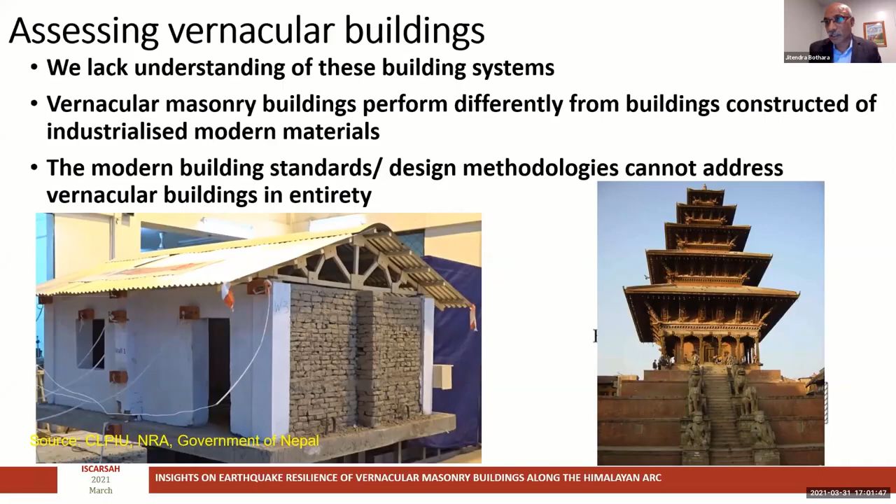The fundamental philosophy is that earthquake safety is life safety. So we can't apply current building codes or standards to evaluate these buildings. So let's go to the fundamentals and look at these buildings from first principles - are these buildings really earthquake safe, or do they meet earthquake resilient principles? So I evaluated these buildings based on configuration, integrity, redundancy, stiffness, deformability capability, energy dissipation, and reduced seismic weight.

If you look at it from a configuration point of view, these buildings are very simple - vertically and horizontally, they are very regular. Their windows are very small, meaning there is a larger wall area to carry seismic force. They have very well-defined load paths, so the load can easily travel from its point of origin to the ground. If you look at the length to width ratio or height to width ratio, it is typically 1:2, and most standards would recommend this should be less than 3. So from a configuration point of view, these are good buildings.

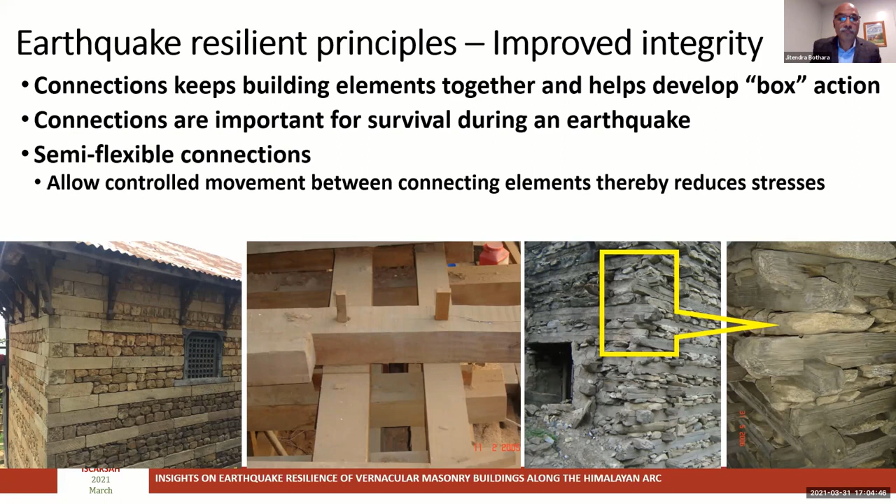What about redundancy? Any resilient system - it could be even our family - if our family is resilient, that means it must have a redundancy plan, it must have a backup system. These building systems have high redundancy because these buildings have multiple load paths.

So that means this system has very high redundancy. And redundancy is one of the traits of any earthquake resilient system.

What about stiffness? One of the biggest problems I have seen in many earthquakes is reinforced concrete frame buildings badly suffering from soft story mechanism, because of obvious reasons.

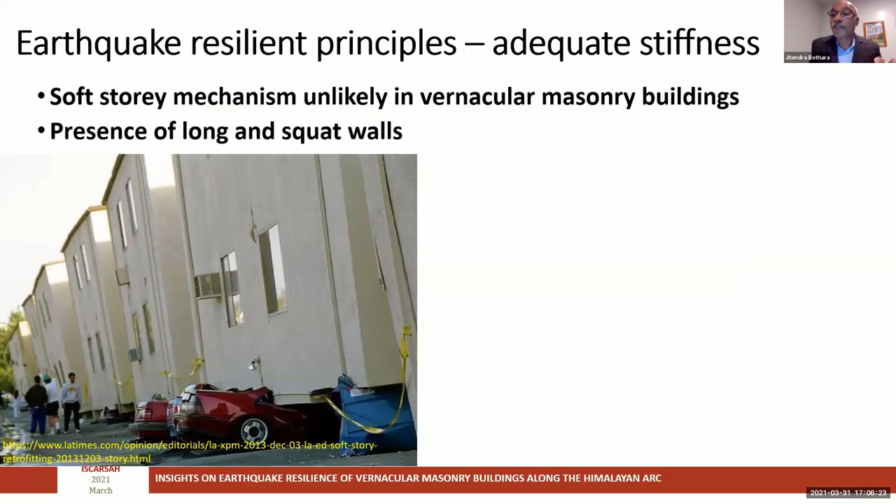Though these vernacular masonry buildings are flexible in nature, they have enough stiffness to avoid such type of failure. Of course, this can happen to these vernacular constructions also if the earthquake is very long and very high intensity, but probabilistically that's very unlikely to happen. So these buildings have enough stiffness to survive earthquakes, though they are very flexible.

What about deformability? These vernacular construction systems work on deformability, their capacity to deform. But if many different elements deform in different ways, and if they do not have compatibility, things would start breaking. The moment one element breaks, a chain of break failure will start, and that would lead to catastrophic failure.

But the good thing with these systems is they are very compatible. Different elements are compatible - for example, the wall is sliding, and the masonry units are sliding past each other. They are rocking like this. The joints are flexible or semi-rigid. So all this controlled movement avoids stress concentration in particular elements, thereby helping the building to survive.

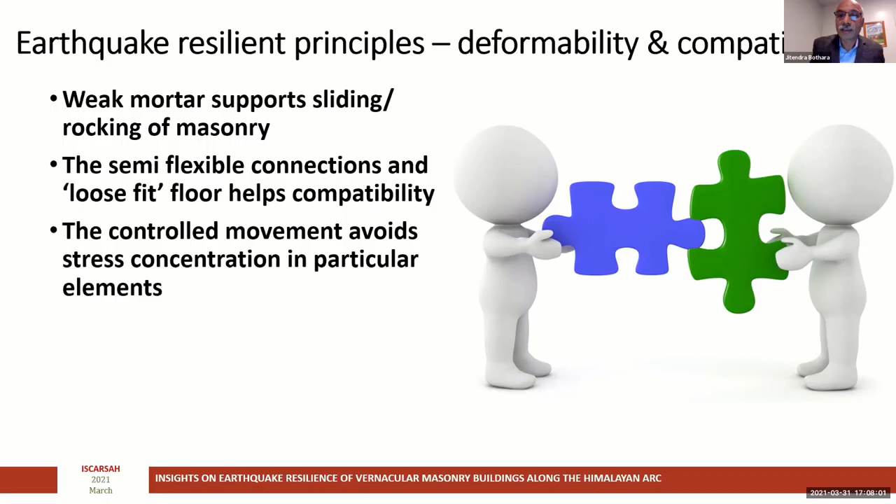Let's look at a video here with timber frame. This test was completed in 2018 when we completed a very extensive test on masonry buildings. So let's have a video.

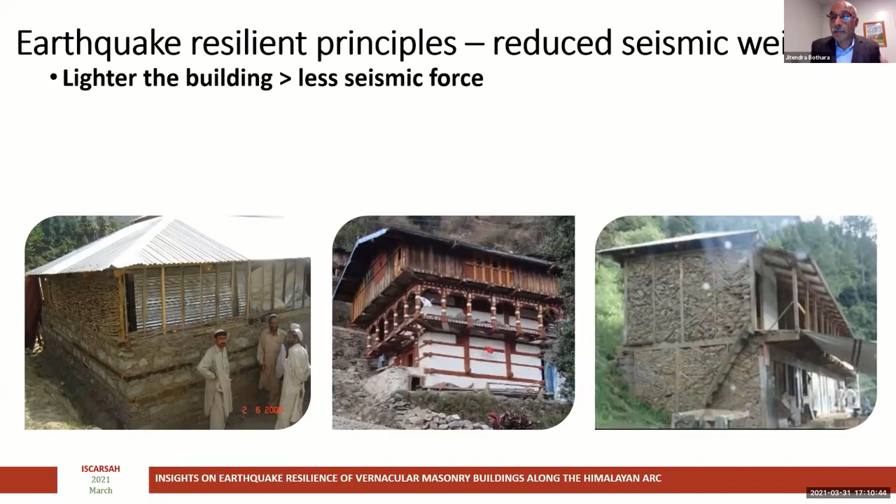So the conclusion is: vernacular building systems are sustainable building systems. And again, I highlight, when we look at sustainability, it is not only about earthquakes or natural disasters. Sustainability means cultural sustainability, socio-economic sustainability, because these are important tenets of life, not only the technology. Vernacular earthquake resilient building systems can provide earthquake safety sustainably.

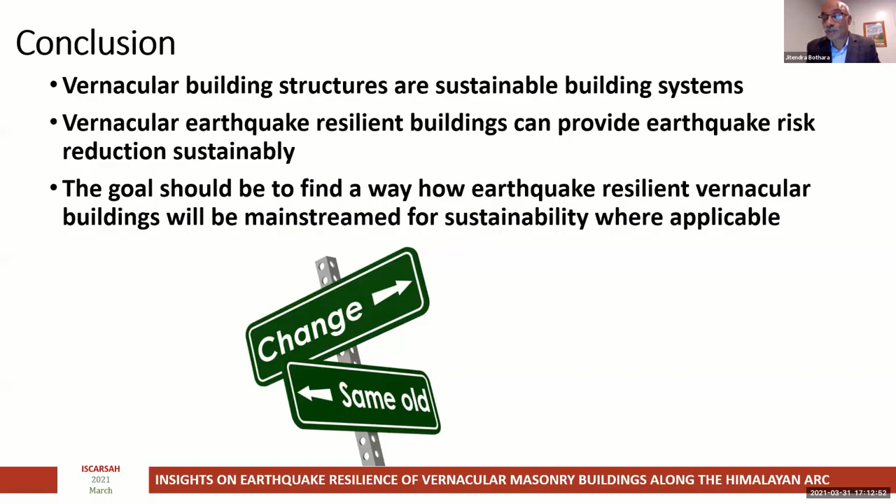Thank you very much. This is all about my presentation. And if you have any question, please feel free to ask.

Thank you so much, Jitendra, for such a wonderful presentation. I particularly liked your analogies, trying to explain very difficult concepts with very simple analogies, and I think it gives us a great overview of why traditional structures can work well. So I would like to pick up on that now, and if you could stop sharing your screen so we can get all of the panelists on the screen, then that would be great.

Thank you. We will go on for about another 15 minutes with discussion based on the questions that were raised. First, I would like to go back to what you put on your last slide, Jitendra, the two signs of change versus go back to the same old. That also brings me back to the points that Fernando raised about traditional versus modern interventions and rebuilding better. I was also really struck, Jitendra, by your comment that we should not glorify, but better understand, traditional structures. So I wanted to ask Steve to comment on that interaction of new and old techniques in traditional structures based on the different approaches you presented, Steve. And maybe later, Jitendra, you can chime in on that as well.